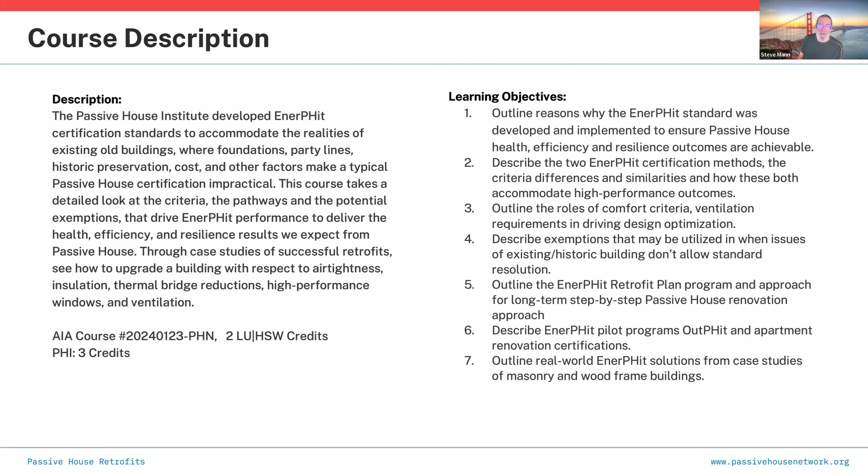Here's the agenda - I think we just did the orientation. I'm going to do 2 minutes about passive house in general and then EnerPHit specifically. I'll talk about the 2 EnerPHit methods - there are 2 different ways you can qualify a building, assuming you want to certify it. I'll talk about some of the more nerdy details of what's involved in passive house in general and EnerPHit specifically. I'm not going to do a deep dive into the nerdy stuff, just enough to whet your appetite if you lean towards the nerd world, so you'll say, oh, this looks interesting, I should learn more about this stuff.

I'll talk about some exemptions for the program. There are a few exemptions with pretty much everything in the world. The answer to all questions is, well, it depends.

Well, that's true in the EnerPHit world as well. It depends. Some things do depend on other things.

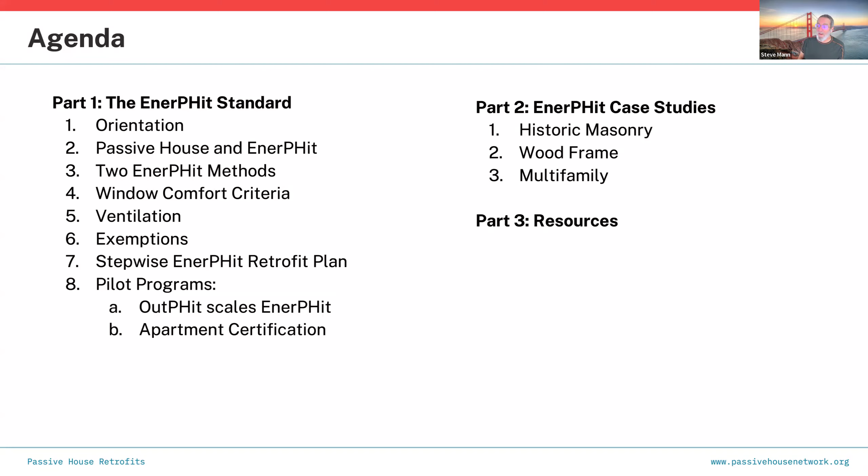I mentioned the pilot programs, and now I'm going to talk about three case studies with pictures, discussing specifics about how you put buildings together or take them apart and put them back together. Unfortunately, none of our case studies are based in California because we've had very few certified EnerPHit projects here. We need more, given the current climate situation. We need to retrofit lots and lots of buildings. Hopefully you'll find this interesting and want to start doing retrofits, becoming part of the climate solution process even more than you probably are now. Since you're here, I'm assuming this is already on your radar.

So let's talk about the standard. It comes from Germany, and the founder of the Passive House Institute calls this a structural intervention, which is his way of saying that if you're going to retrofit a building, you should do it properly. When they decided to develop this program, they had to define the way to do this, so that if you retrofit a building according to these criteria, you're doing it properly.

That means two things: you retrofit the building so that you achieve what you want to achieve, and you do it in such a sequence—because retrofits don't all happen in one big lump typically. They might not, so they assume there may be cases where you want to retrofit in stages. That introduces some interesting situations you need to be aware of in the passive house world. We'll dig into all of that.

The point of this slide is to say that retrofitting applies to any kind of building, from small to very large, and the principles are the same. The way it's actually achieved might differ from building type to building type, but the end result you want to achieve is pretty much identical.

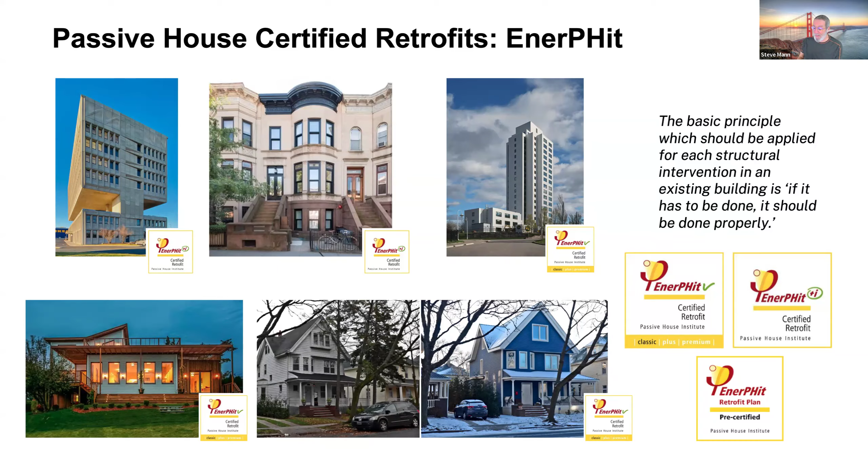Let's talk about passive house, which sets the stage. There are a bunch of goals we want to achieve. There's a stereotype that in the passive house world, the primary goal is to save energy. That's actually not the primary goal, although it's listed first here—it should be last on this list.

The primary goals are occupant comfort, which has to do with temperatures, and indoor air quality—you want excellent indoor air quality. You want the building to be so durable it can last for decades, perhaps even a couple hundred years, and you want it to be resilient. Then finally, if you achieve all those goals, what comes out of that is low operational energy. That's like a side effect, not the primary goal. It just happens naturally if you achieve these other things.

There are five basic principles we look at. Going clockwise from the bottom left in the picture on the right-hand side: first is thermal insulation. We want the right amount of insulation around the whole building, on the outside or inside, creating basically a cocoon—or another analogy is a nice warm coat suitable for all climate conditions for the location you're in.

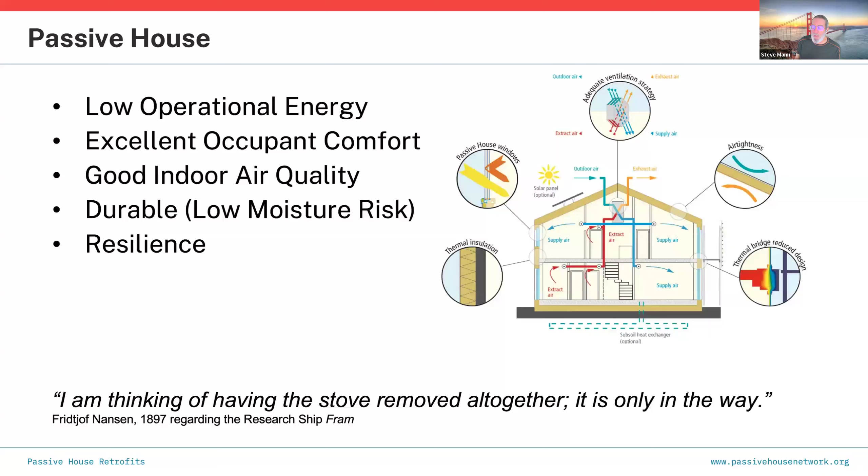That achieves a couple of things: it lowers your operational energy, but also helps guarantee a low moisture risk. We evaluate these things, and if you have those, you have a resilient building. So all of these work in synergy to achieve the goals we're trying to achieve. I'm going to talk about all of these a bit more as we go on.

Okay, this is for passive house new construction. This is one of the nerdy slides. We have very specific numbers we have to hit in order to certify a building, and I'm not going to talk about these in great detail—I'm just going to say these numbers are tough to achieve. They fall into the areas of heating, cooling, air tightness, and primary energy, which is the amount of energy consumed by the building to run the building.

If you look at heating demand, here we have 4.75 kBTUs per square foot per year—you don't need to remember that. That heating demand is the amount of energy the building consumes in a year, and that's typically about 75 to 90% less than a code-built building. That's a pretty tough criteria to hit, but it's totally doable.

Same kind of thing with cooling—again it's 4.75, with a fudge factor for dehumidification if needed. Again, you have to hit that; you can't be greater than that energy consumption.

The tough one is the air tightness: it's 0.6 for new construction. Now, 0.6 is approximately 1/10 of the current criteria for a new single-family residential building in California under Title 24. Same thing for multifamily. So this is why it's scary—that's a really tight building. You really are trying to build a balloon. It's not a perfect balloon, but it's as perfect as you can get it.

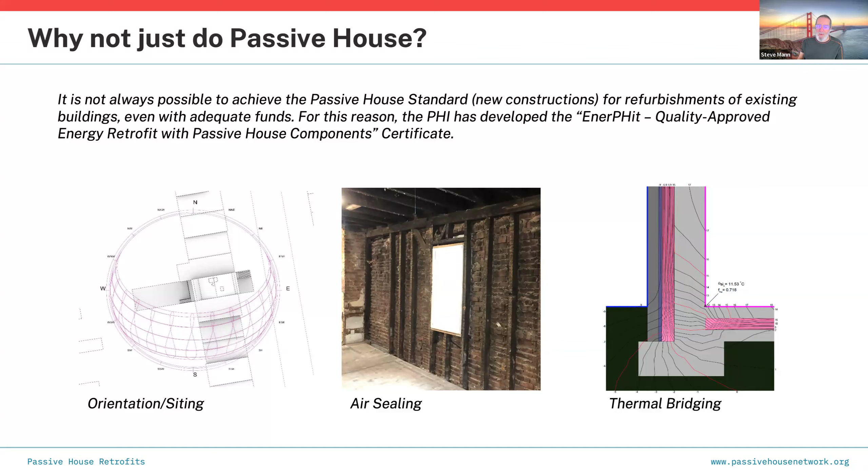These are the two tough areas: the air tightness and thermal bridge free. It's possible to replace windows, it's possible to put continuous insulation on, and it's possible to do mechanical ventilation with heat recovery. So 3 out of the 5 are pretty easily achievable, 2 out of the 5 might be difficult.

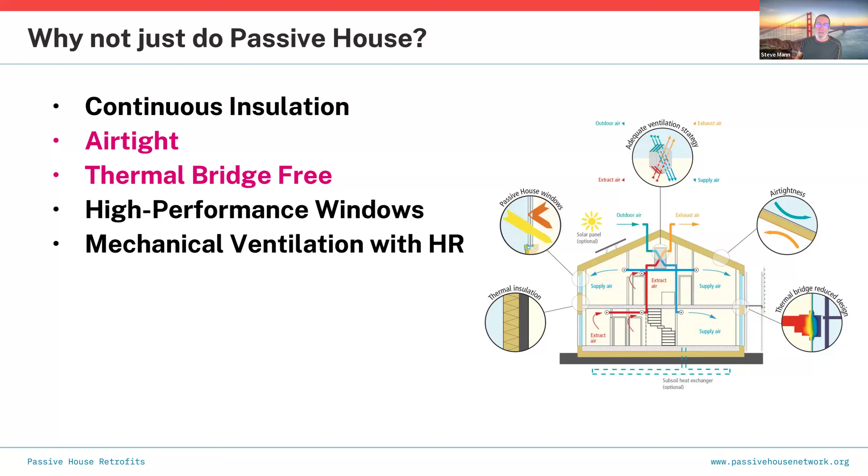So the passive house world was created about 30 years ago, back in, I think, 1990, roughly around there, somewhere in that time frame. They did passive house new construction for 10 or 15 years, and then they said, okay, what about retrofits? So they did the first pilot project for retrofits in 2010.

That equates to roughly about $150 per square foot, roughly. Don't check my math on that, but that's in the ballpark. And what they found was they achieved all the goals they wanted to achieve. Also, the operational energy of the building went down by 85%, so utility bills were reduced 85%. Everybody's now comfortable, and the air quality is good.

The building has been made over so that it now has a lifetime of maybe 100 years, maybe 150 years. Whereas otherwise, if this wasn't done at some point, maybe it would have been torn down and replaced, which is kind of what we do here in North America in a lot of cases.

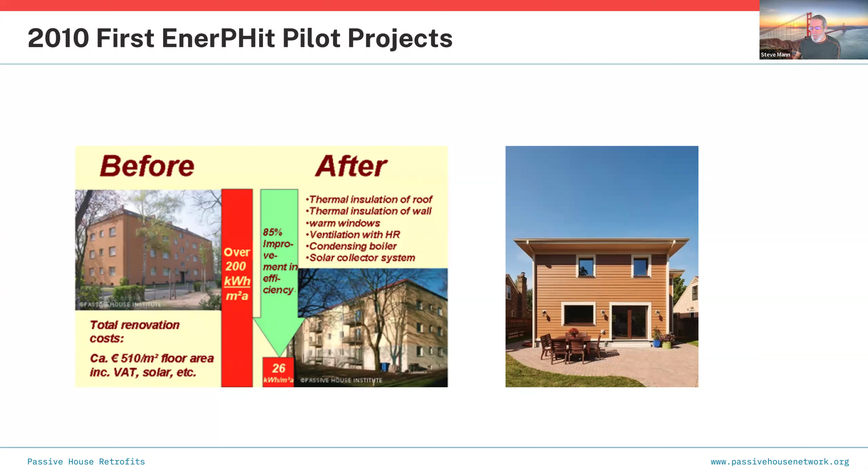The picture on the right shows, I think, the second pilot they did, on a single family residence. Same approach applied, and they managed to achieve the same kinds of results. So this is where this all started, back around 2010.

This is actually, well, it is a retrofit technically, because this was an existing house in Santa Cruz, and they did tear it apart and put it back together, but they did it in such a fashion that they were actually able to certify it as new construction. They met the metrics for new construction, even though it's a retrofit. So it's kind of the first one in California that was actually a retrofit, but technically treated as a certified new construction build. So it's one of those hybrids, a little bit of this, a little bit of that.

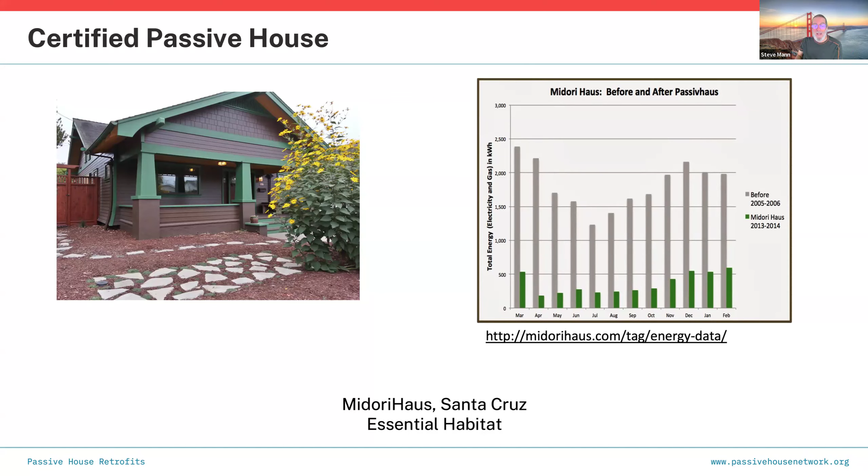But that's the place to start. Talk to a certified passive house consultant or designer or certifier and say, okay, I've got this building, I'd like to retrofit it, here's kind of what its situation is. Do you think that's possible? If so, how do we go about achieving that? And does that make sense? You can start the conversation at a very non-nerdy level, but eventually somebody is going to start digging into the numbers, because there's a very scientific approach to doing these buildings. That's why it works.

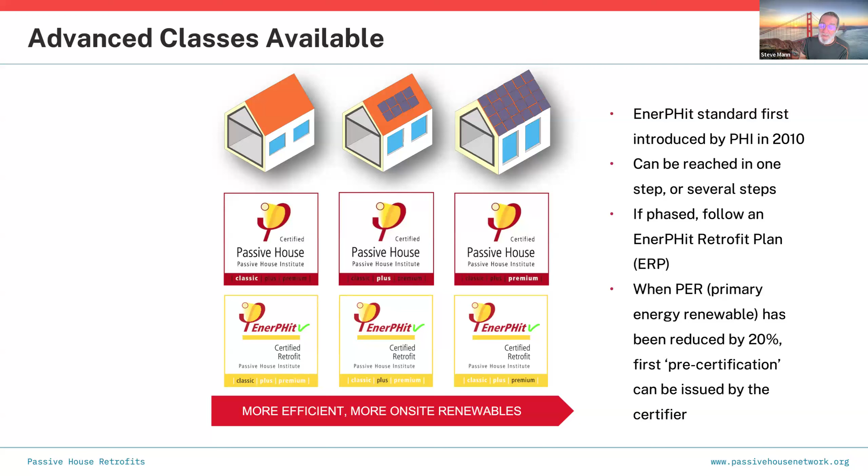Okay. Let me just take a quick drink of water before my throat gives out. All right, I don't see any questions yet, so that's good.

I'll keep plugging along. There are two methods if you want to certify a building as a certified retrofit. The two methods are either the heating energy demand method or the building component method. And then within those two methods, there are the three classes I talked about, where you have more PV towards the right. In addition to these two methods, there's some general criteria that applies to both methods. I'll dig into all of this stuff a little bit more.

The energy demand method is basically a calculation. We use a piece of software called the Passive House Planning Package. A certified passive house designer or consultant, or anybody who knows how to use this software, builds a model of the building in the passive house planning package, does the calculations to determine if certain heating and cooling and renewable energy criteria are being met. And if so, then the building can be certified.

The other method is, instead of doing the calculations - although you still use the passive house planning package, but in a different way, a simplified way - there are a list of thresholds you have to meet for different building components, like insulation values in different locations, window values, ventilation values, and so on. I'll show you a few examples of this. So you can take either approach, and they're both viable approaches. Depending on the situation, one might be easier than the other. This is why it often makes sense to get a certified passive house designer or consultant involved early on, to determine what might make the most sense.

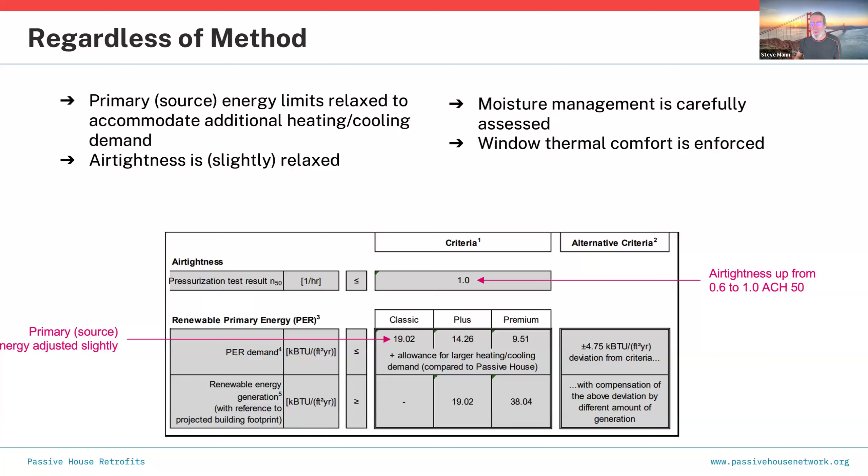This is why air tightness is really the superpower in the passive house world. If you can achieve this and nothing else on a retrofit, you've done a great job of radically improving the quality of the building, reducing energy consumption, and reducing the impact on climate change.

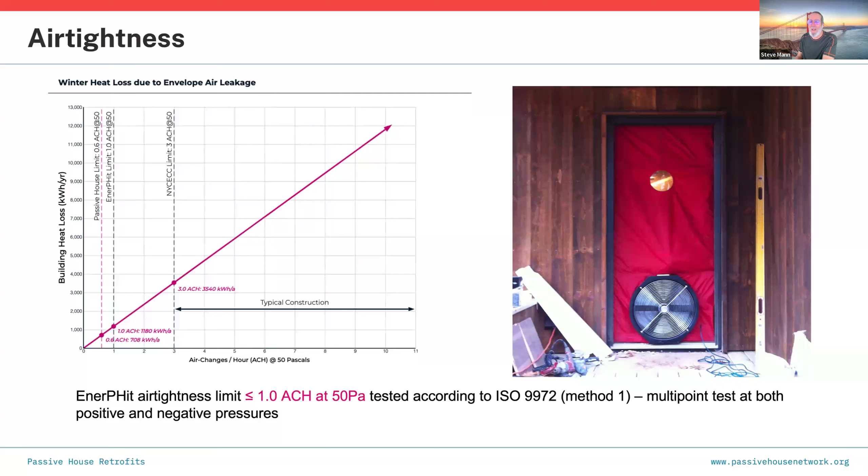there is a mandatory leak detection. So when you set up to do this test, there's a final version of this, this is the grand finale. You do this test, and regardless of whether you hit the number 1.0 or 0.6 or whatever, you're supposed to go and do mandatory leak detection. That basically says, okay, we got our air changes per hour number, but we're also going to go and look to see if we can find any other leaks to get it even lower. You have to do this as part of the process.

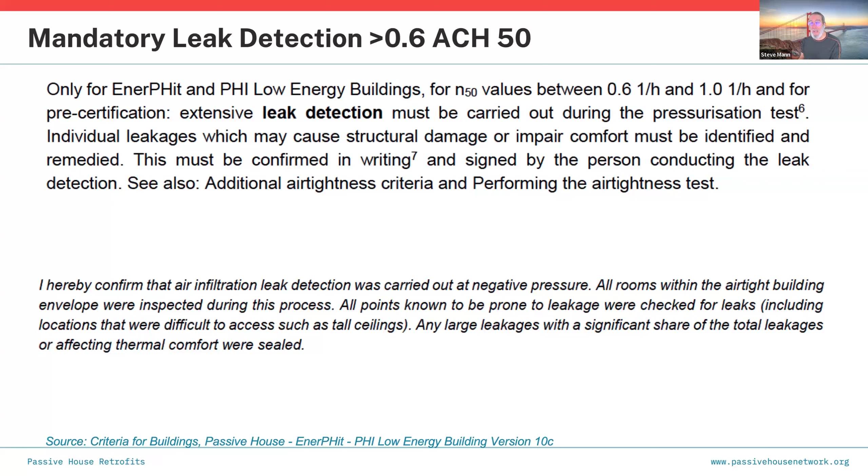And then the builder or the third party doing the testing has to file a document with the certification people that says, yes, I confirm we got the blower door test and here's our number, and by the way, we also went and did this additional leak detection. We looked at all the spots that were prone to leakage. Once you do this for a while, there are certain places that are more prone to leakage than others, so you check those for sure, and you look to see if you can find any other leaks. If you can, you see if you're able to fix them or eliminate them. So this is just going one additional step to make your result even better. This is required as part of the process too.

Okay, so that's the airtightness process. Let's talk about moisture resistance.

I'm going to check our time here. Let's see how we're doing. We're doing okay, I believe. I can find my clock. I don't see my clock. Okay, that's all right, we'll just keep going. Steve, it's 10:08. 10:08. Okay, good. I think we're doing all right. Thank you, sir. Sure, okay.

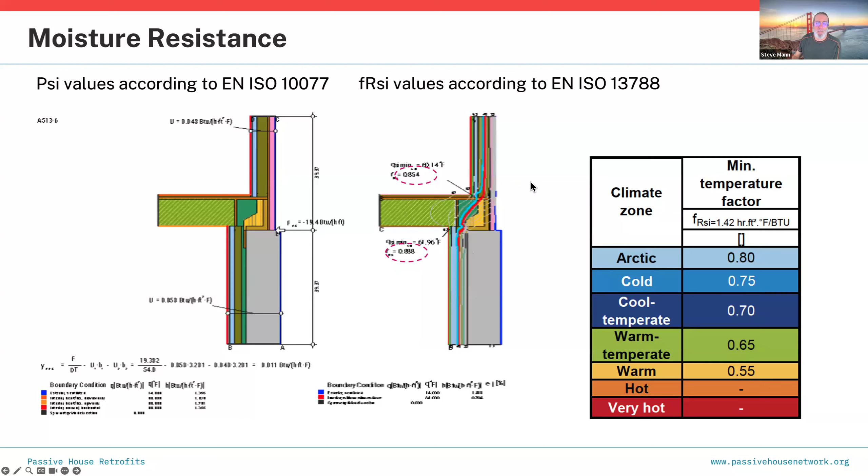In the passive house planning package, there's a threshold that's calculated for this project. Remember, this chart is a good starting point, but in the new world we're in, it's project specific. So in this project specifically, the FRSI number has to be greater than 0.45.

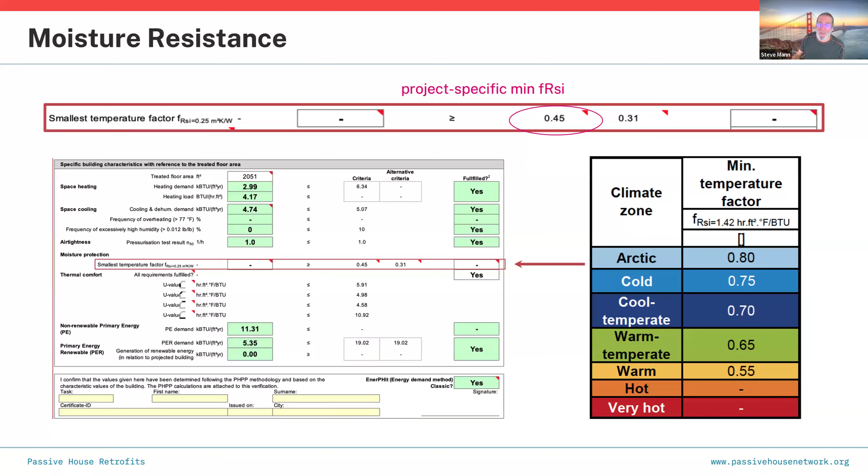The passive house planning package has a dashboard that shows you overall how this project is doing - here's your heating, cooling, air tightness, moisture protection, and thermal comfort, which we'll talk about in a minute. The dashboard shows you everything, and moisture protection is one of those things. If you get all green yeses, that means the building can be certified, or if it's finished and the software reflects the finished conditions with all green yeses, it means the building should be certified and can be certified.

Now the FRSI number in retrofit - you can have constraints, and one of the biggest ones is where to put the insulation. You may or may not be able to tear the building apart from the inside or from the outside, and you don't know until you start digging into the project. There are a lot of reasons why you can't insulate on the outside, although you may want to.

We'll look at some case studies. Where you put the insulation makes a big difference on many things, one of those being the FRSI number. So on retrofits, we pay very close attention to this because the insulation has a big effect on it.

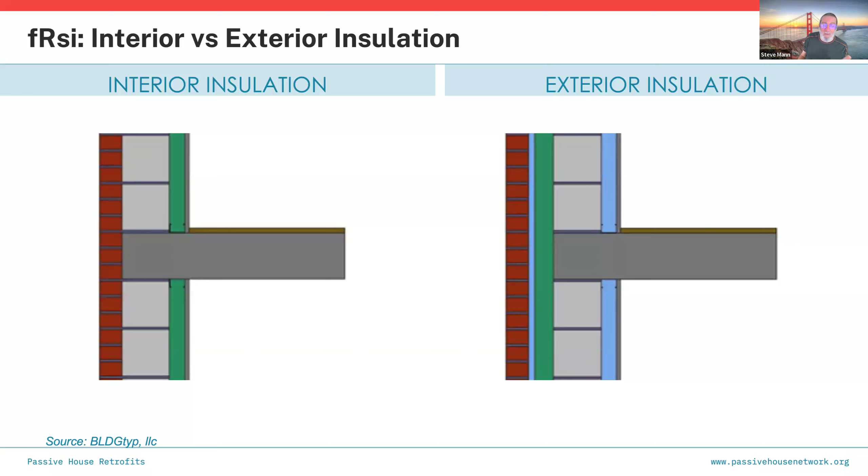If we look at these two cases, on the left, the insulation is on the inside. In these kinds of pictures - this is another finite analysis software picture - it shows temperatures, and the redder the numbers, the higher the temperatures. That's a simplification, but that's kind of it. You want as much red on the inside as you can get, because that means there are no cold spots. On the left-hand side, with insulation on the inside, at that location the FRSI number is 0.554, which may be too low, depending on the climate and the project.

The situation on the right, the insulation is on the outside, and the FRSI number with that assembly is 0.911, which is going to be great regardless of the climate zone, except maybe in Antarctica - I don't know, I'd have to see the modeling software and the outcome. So in a retrofit, where you put the insulation is a big question, and this is one reason why.

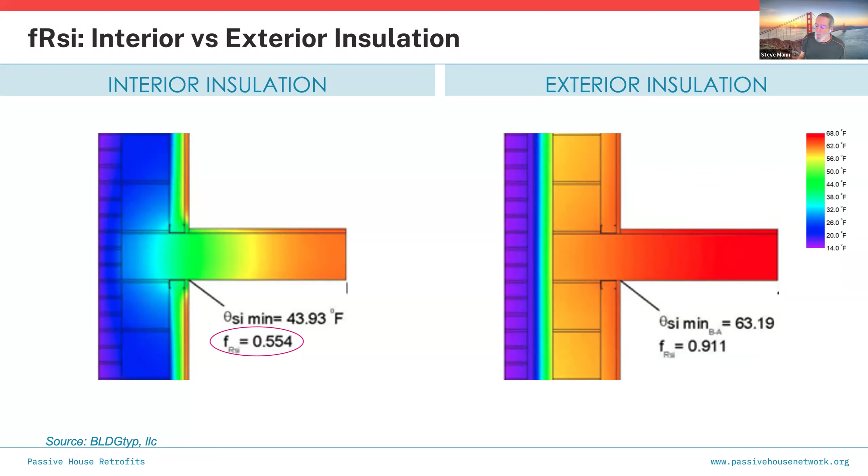If you have insulation on the inside, there are ways to mitigate those potential problems, that low FRSI number. For instance, here's one approach, and this is where you end up getting a consultant involved early, someone who knows how to do this calculation, because before you even start tearing the building apart, you should be looking at this junction and determining if you have a problem. In this case, one possible solution is adding insulation on the inside underneath the floor assembly, which raises the FRSI number from 0.554 to 0.606. That's better, but if it was my building, I'd want it even better than that. And this is ignoring the whole question of, if you've got insulation glued on the wall or ceiling, how do you deal with that architecturally?

Is that in a basement? If that's in a space that people actually use regularly, you're going to have to do something with that aesthetically. So oftentimes with retrofits, we have to look at these junctions early on to figure out how we're going to deal with them. And this is true.

Intersections between walls and floors are big points, but even more problematic or more difficult to deal with are intersections between floors and foundations, walls and foundations, and walls and roof lines. Those are the critical places we have to be looking at. So this is the kind of analysis we need to do in those spots.

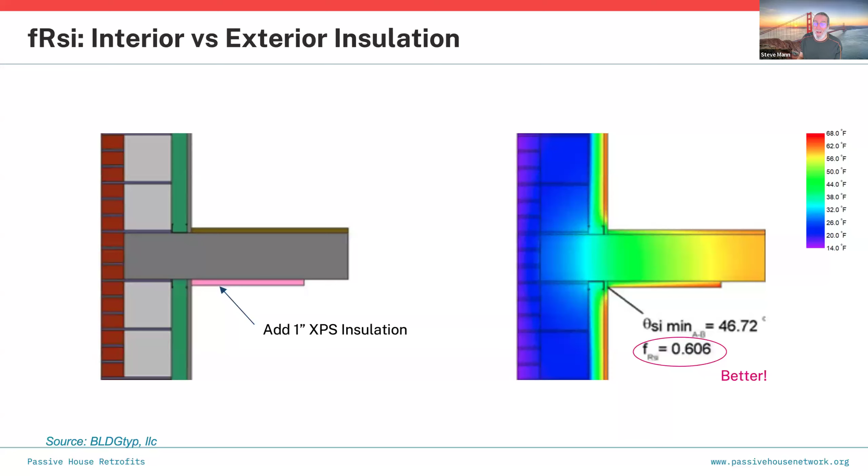Okay, so that's a little bit about FRSI. That's a little bit about psi values, which I'll talk about some more. Let's talk about the comfort criteria.

Remember, the primary reason we build these buildings is because we want to create a situation that the occupants are very happy with. We want them to be comfortable all the time. We want them to have good air quality all the time. We want them to be happy, essentially, to boil it down and simplify it.

One way that people are unhappy in cooling climates or heating climates is if they stand next to a window, or in the vicinity of a window, and the temperature of that window or coming through that window is very different from the temperature we want on the inside of the building. In the wintertime, typically we're looking at about 60 to 70 degrees, and in summertime, we really don't want to be any higher than about 77 degrees.

Those are passive house thresholds. Other systems or other values, let's say like ASHRAE or ISO or something like that, might have different comfort criteria. These are passive house comfort criteria.

So what we need to do, in order for the windows not to be a problem, is make sure the temperature of the window is within about 5 degrees of the interior temperature. Now, depending on how you calculate this and how you look at it, it might be 4 degrees, it might be 6 degrees—it depends on the climate zone and, again, the project and everything else. But we're looking for something in that range.

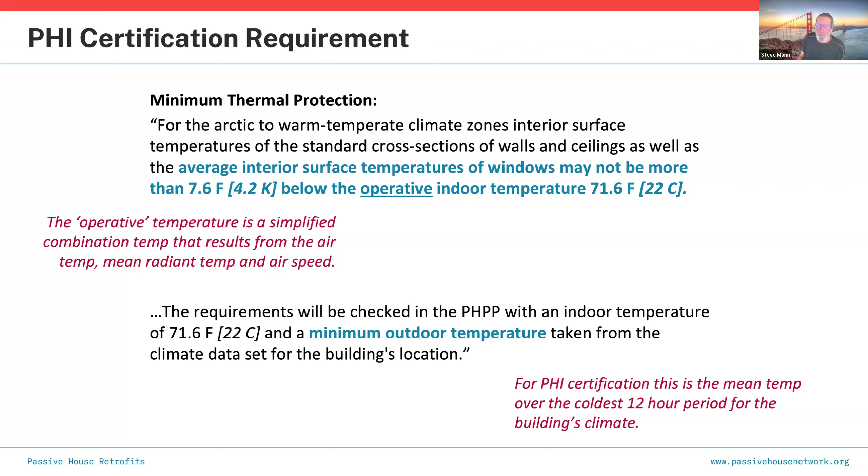Notice that the passive house planning package calculates the actual thresholds, and I'll show you that in a few minutes. It hides a lot of the complexity of the calculation. What you need to know is that you just want to make sure the windows are of sufficient quality so that you do not have a significant temperature difference between inside and outside.

This is what it looks like in the passive house planning package, which is a big spreadsheet. For those who don't know, it's a really big spreadsheet with about 40 tabs in it. This is just a portion of it. Here you can see this is the exterior temperature—they're assuming this is the worst case exterior temperature. So that's the threshold they use to determine the window comfort criteria.

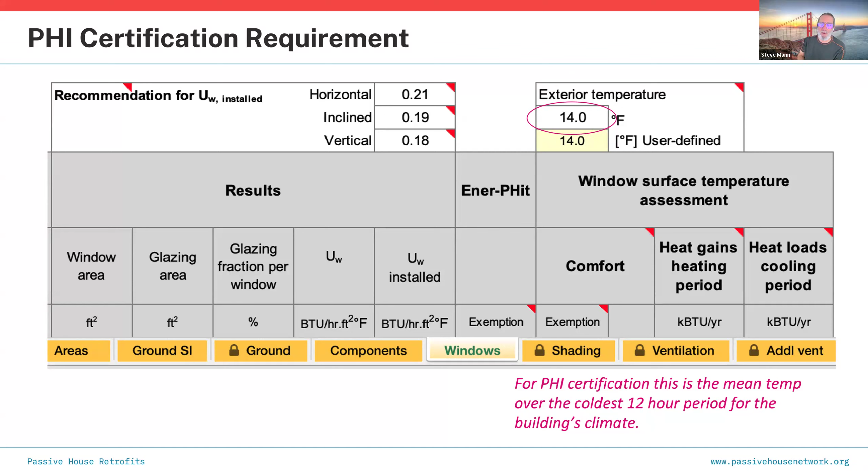So the question is, well, how do they do that? When the passive house planning package calculates what a window is doing, we look at all the individual components of the window. Here, from left to right, we look at the U value of the glass. For those of you who don't know what U value is, it's the inverse of the resistance, which you probably all know.

That's the ability of a material to resist thermal energy transfer. So the U value is the ability of a material to transmit energy through it. We use the U value to make the math work out. Again, that's a gross simplification, but I don't want to dig into that anymore.

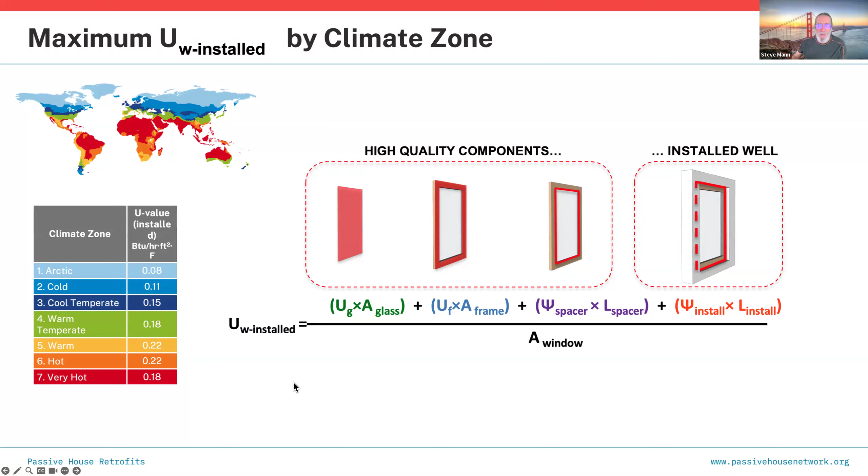But what actually happened is in the Passive House planning package, it looks at this for every window. Notice here, this is for a vertical window, it says 0.18, and this 0.18 is for the UW installed value. So this implies that this project is in a warm temperate climate.

Now you don't know that for sure because it depends on the project - this is a project specific number, but it suggests that. What's more important is that's the threshold for this project, that's the exterior temperature. We calculate a UW install value for each window. Now notice this number says 0.18 is your recommended threshold, and all of these are greater than that.

What happens is there are exemptions depending on the size of the window. In this case, these two windows are smaller than what the Passive House planning package and process cares about. They're assuming that if the windows are that small, the temperature difference isn't felt as significantly because the glass area in the overall assembly area is smaller. So there are some exemptions there.

But notice this one over here, the UW installed value, it's a larger window - 16 square feet - and the UW installed value is greater than the threshold. So the Passive House planning package automatically flags this as exceeding the comfort criteria. That's what we looked at there.

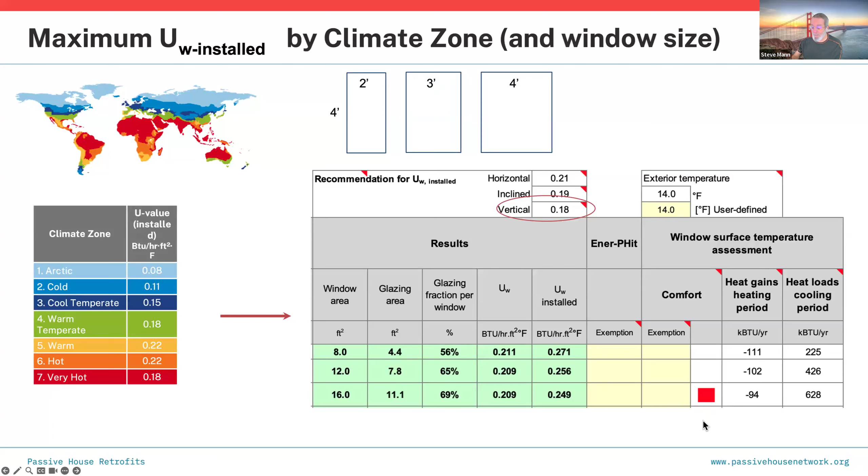Okay, that's window comfort criteria. Let's talk about ventilation.

All passive house buildings have to have continuous balanced ventilation, whether it's new construction or a retrofit. In a retrofit, the question is when do you put this in, especially if you do it in phases. If you tear the building apart and do everything at once, it doesn't matter. But if you do it in phases for whatever reason, you have to be careful about when you put the ventilation in. So here's the basic ventilation concept.

Now you actually have to put air sources in all the supply rooms and exhaust registers in all the exhaust rooms, but you do not have to put some kind of air source or exhaust source in every room. What we do is put supplies in the primary rooms, living rooms, dining rooms, bedrooms in particular, because we spend 8 to 10 hours a day in the bedroom. Then exhaust, like I said, in the bathrooms, laundry rooms, and kitchen. Hallways, entryways, mechanical rooms, closets, places like that don't need to have a direct supply or exhaust in them.

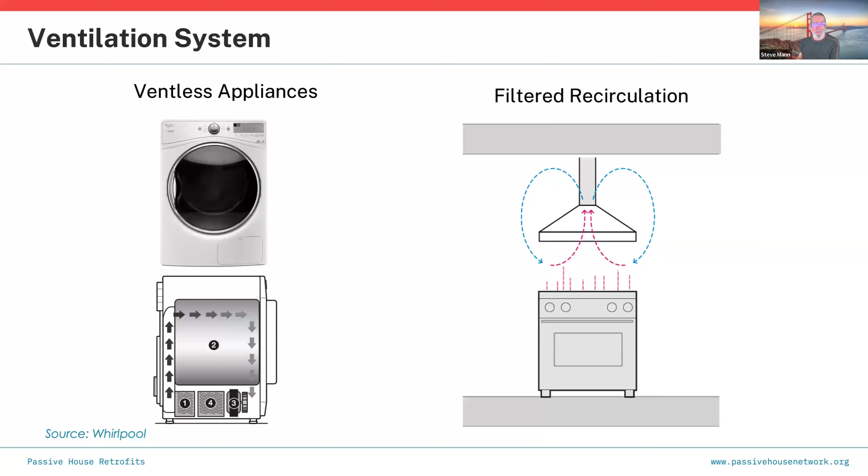Do it in such a way that you don't disrupt the construction sequencing, and that you don't pretty much wreck the interior of the building. You have to put the ducts somewhere. The other approach is each unit can have their own individual ventilation unit, and sometimes that's done. I've seen both approaches done on multifamily buildings. It depends on a lot of factors.

So you need to get your mechanical engineer involved, have that discussion, talk to your passive house consultant, so on and so forth. And one thing that comes into play here, which is not shown in this slide... no, it's not, okay, sorry. It's where do you put the ductwork?

And this comes up for the appliances too. The more ductwork you put in a building, the more potential thermal bridges you have, the more energy impact you have. You want your duct runs to be as short as possible and insulated. So that comes into play when we calculate a model for one of these buildings.

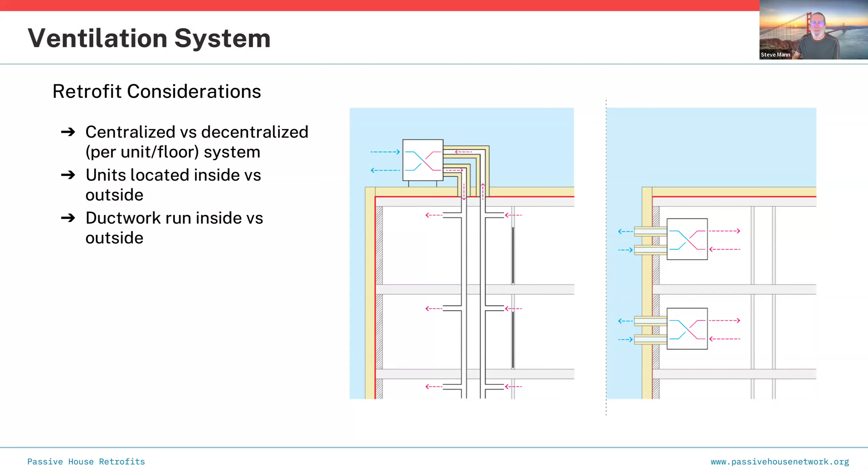We talked about the methods, okay? We're kind of jumping around here. We've already done this slide. Two methods: energy demand and building component, and then general criteria, okay?

On the energy demand method, you actually build a model. It's similar to new construction, but with relaxed criteria. In the EnerPHit building component method, it's prescriptive. We also have this kind of thing in the California Energy Code - performance and prescriptive based methods. So it's similar to that.

In the prescriptive method here in the EnerPHit world, you have specific R values, U values, and you have to have a ventilation system that's at least 75% efficient.

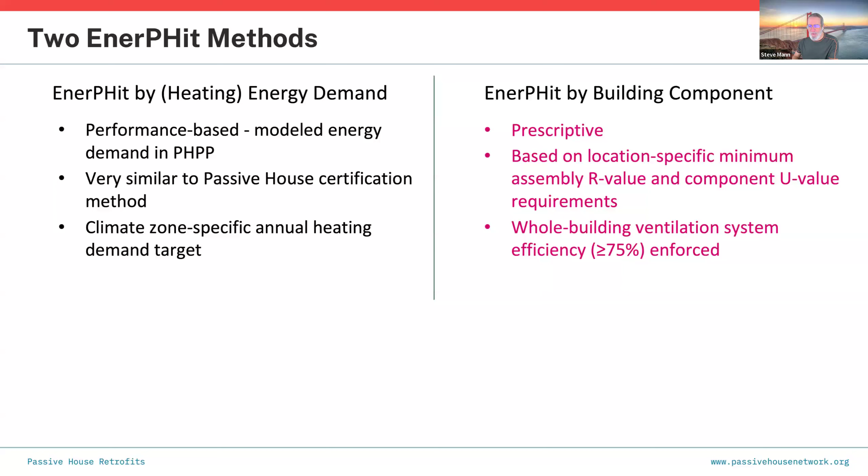This is climate zone dependent. Here are the passive house world climate zones as defined by the Passive House Institute. These are different climate zone definitions from any other organization that I've seen. And for the passive house world, these work just fine.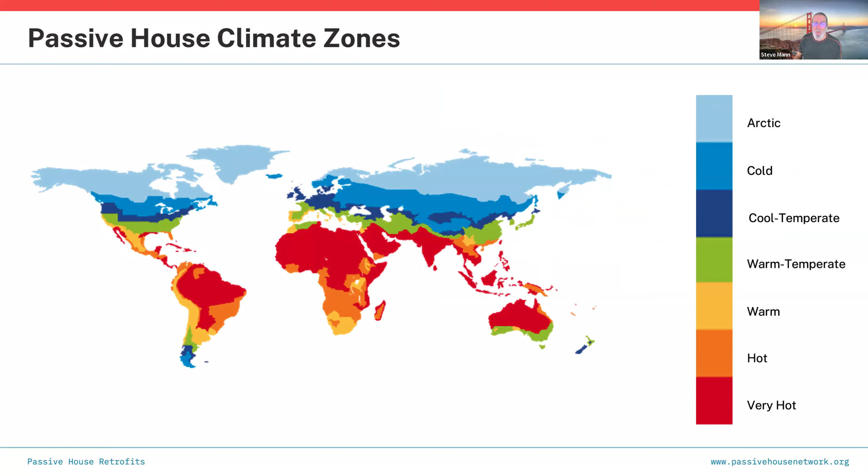I think I've covered that, I think I've covered that. Okay, so in the PHPP, remember I said there's a dashboard. For new construction, this is the dashboard up here. There's also a dashboard for EnerPHit.

Notice this is the prescriptive approach here. This is the building envelope criteria, U values and things like that. There's solar heat gain coefficient, so on and so forth - this is the prescriptive criteria. This is the performance approach, but this is no heating or cooling demand criteria.

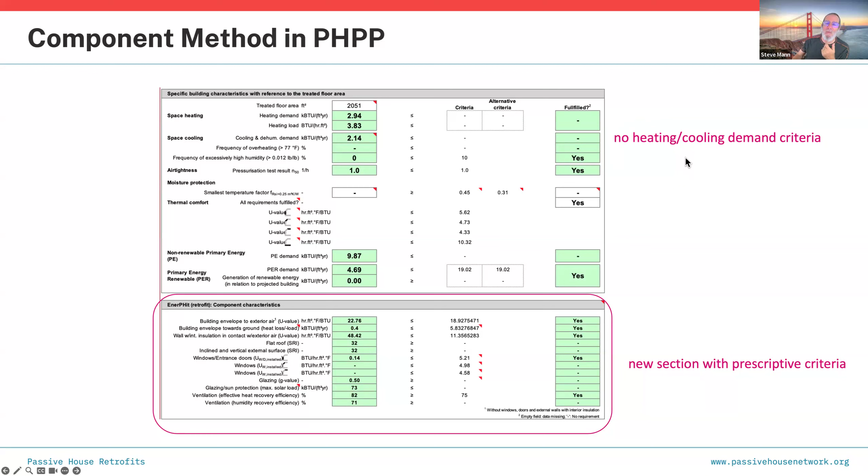That's not true, I'm seeing heating and cooling demand right here. Okay, so this looks suspiciously like - here we go - thermal comfort. This is the EnerPHit performance approach. So this label here is not quite correct.

Oh, here we go with the ventilation system efficiency. That really ought to be in that other location - it just shows two different places. Here's your heat recovery ventilation equipment. Here it's down here, much longer duct runs. Here there's ventless appliances, here there's vented appliances. All this ductwork has to be taken into account.

Notice in this particular case, the 84% efficient energy recovery ventilator - which is one of two acronyms for ventilation equipment - is 84% from the factory, but when you factor in all this ductwork, it goes down to 71%. What happens is these exterior venting equipment, in addition to the ventilation system, like the dryer and the range hood, get factored into this too.

So this is not eligible for component certification. That's the point we're trying to make here. So it matters where you put this stuff - that's the simple message here. And that has to be figured out in advance, again probably before you start tearing the building apart.

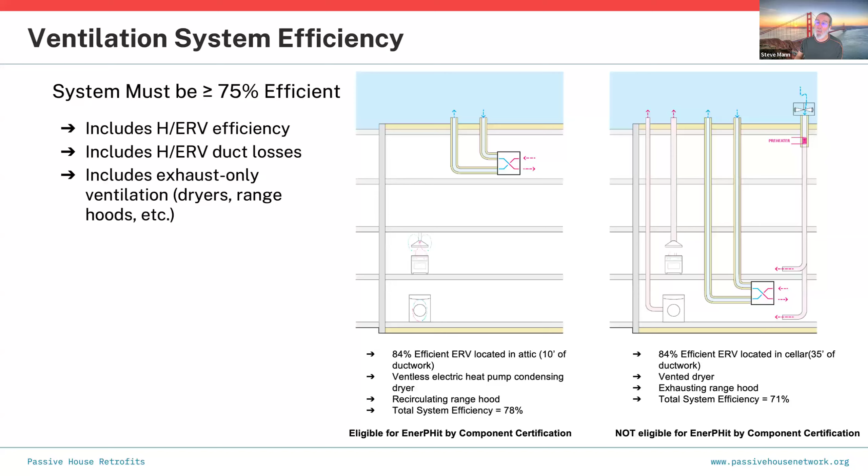Exemptions - there are exemptions in EnerPHit. There is the criteria that we've talked about, but there are certain problem areas that you just might not be able to work around. We have a similar thing in Title 24 - there are exemptions in certain cases. Let's say there's an exemption for solar PV installation if the building is surrounded by too many trees and there's no solar exposure. There are exemptions for historic buildings that are designated historic structures where you cannot modify the outside, at least the visual appearance, so on and so forth.

We have a similar thing in the EnerPHit world. Here's a couple of them: legal requirements - I can't think of a good example of that - and historical building preservation authorities, that's kind of a legal requirement.

Cost effectiveness: if in order to insulate the building properly you have to spend two times the budget you've got available, or whatever reason, I'm not quite sure what the effective threshold is. It's kind of up to the designers, the architects, the developer, and the building owner to determine what's not cost effective and to make a case.

No available components. Let's say in a particular case you need a fire damper of some kind because the local building code requires it in a multifamily building, and you just can't find one on the market in the United States that satisfies the EnerPHit criteria. The biggest one, which will show up on the next slide, is the heat transfer coefficient, or the UW install of the window. That's other compelling reasons related to construction.

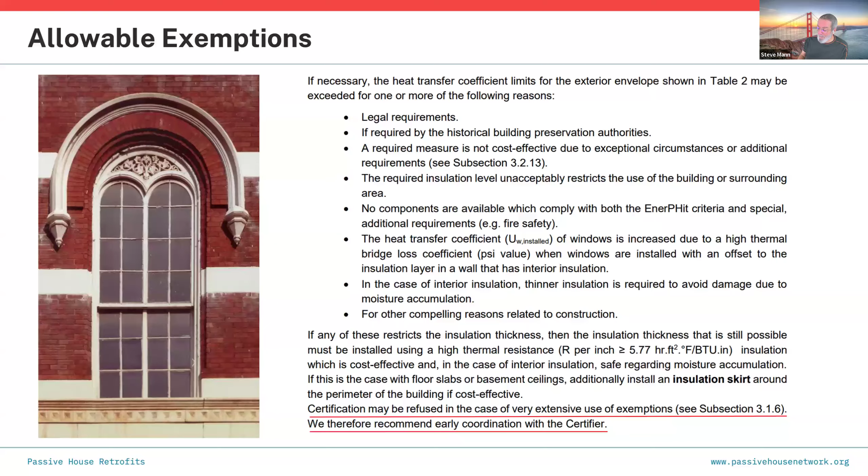Here's one of the compelling reasons. Remember I mentioned the thermal comfort requirement for rooms with prolonged occupancy. This goes back to the window issue, or maybe the FRSI issue. You could make a case for that, although that's a tough one because FRSI problems introduce mold, moisture, and mildew, which you don't want regardless of the use of the room. That's more for window comfort criteria.

The one I've seen most is the window comfort criteria where you just can't hit it for whatever reason. The case I'm thinking of is a commercial building, a franchise actually, and the franchise had specific requirements for sizes of windows, locations of windows, and the direction the windows were facing. They found that regardless of what kind of windows they bought, there were no windows on the market that would satisfy the window comfort criteria.

They were able to get an exemption for that by putting little heating sources directly under the windows, like strip resistance heaters. So if it was too cold outside and the comfort criteria was not satisfied, the heaters would turn on and the surface of the windows would rise, satisfying the comfort criteria. That has a penalty on operational energy, but it worked out. It had to be calculated in the modeling, and the additional energy consumption did not turn out to be a problem.

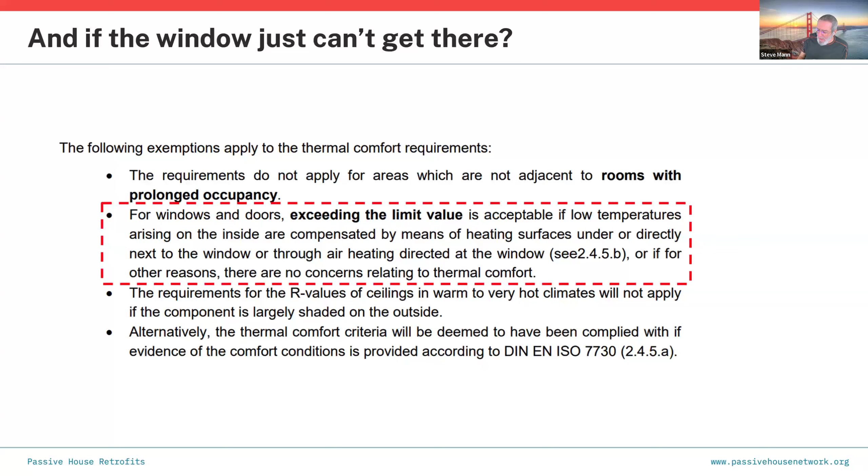So if you're looking at EnerPHit and it's a challenging situation, there is some wiggle room above and beyond the specific certification criteria, depending on the circumstance. This is the case of a door threshold that just didn't hit the comfort criteria, and they put a strip heater under there. If you do an infrared camera shot of that, right at the threshold of the door, the temperature was more than sufficient to satisfy the comfort criteria.

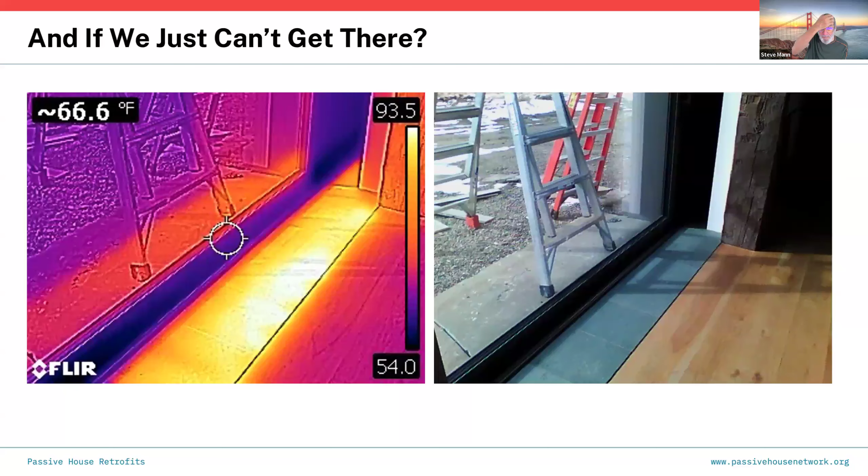Okay, so that's some of the things we look at. That's by no means everything. Oh, I see a question from Dorothy.

Does a solar array on the roof count as shading? It depends on what world you're talking about. In the Title 24 world, no, that's irrelevant—it does provide some shading, but Title 24 doesn't really care about that. In the passive house world, it can count as shading, and in fact you're supposed to take into account the effect of shading on different parts of the building, not just the windows, but all the surfaces. The thing is with solar panels, they do cast a shadow, but they're also glass, so they cast a shadow but don't really effectively block a huge amount of the solar radiation, though I've heard some solar panels do that better than others. You really don't get a huge benefit from treating those as shading—you can get a little bit, but it's not a huge surface area or a significant benefit. But technically in the passive house world, yes, you can. Hope that answers your question, Dorothy.

Okay, the retrofit plan. Now remember, there are two types of certifications, and there are different ways to go about doing a retrofit. Excuse me, just a second, more water.

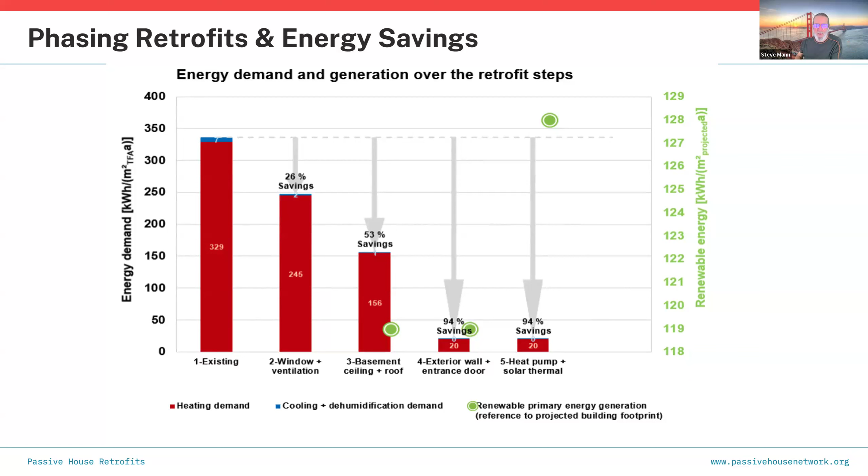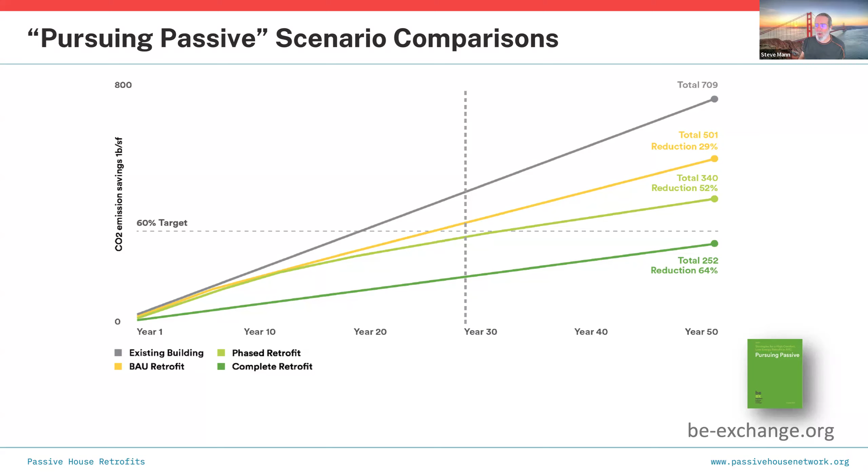But if you can't, in the middle you've got two different types of retrofits, and they both definitely reduce CO2 emissions, but only by 30% in the yellow case and 52% in the light green case, over a 50-year time span. So that's better than nothing, but not nearly as good. At the top we've got an existing building that doesn't get retrofit. This is assuming a global CO2 emission total of 709, I'm guessing that's pounds per square foot over a 50-year lifespan. So clearly the best thing to do is a total retrofit all in one step, if you can, from this perspective.

That's kind of it in the EnerPHit world. That's the introduction. Now let's talk about the pilots—these are other things being done in the EnerPHit world.

The first one is something called outPHit, catchy name. Basically what they're doing is taking prefabricated components and putting them on the outside of a building while people are living in the building—hence the name outPHit. What they're trying to do, like the EnerPHit pilot they did 15 years ago, is determine if they can take this approach and achieve the EnerPHit standard. So it's in a pilot phase.

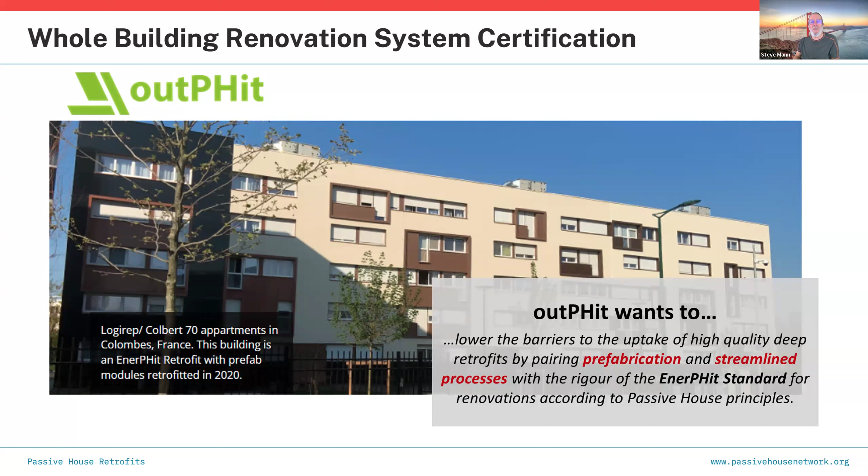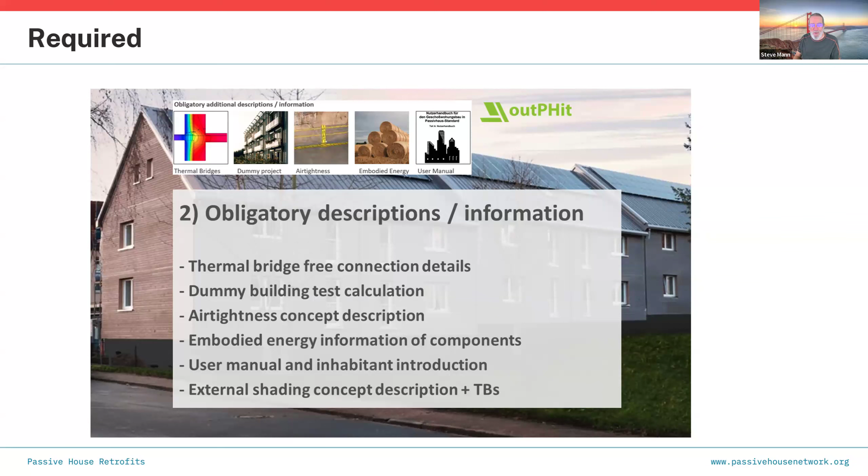In order to do this, you have to do analysis that contains all this stuff. You have to look at the thermal bridges. You have to do a dummy building test calculation, which is basically a building model in the passive house planning package. You have to describe how you're going to make it airtight. You have to talk about the embodied energy of the components, which doesn't come up in the new construction or EnerPHit world, although people are starting to pay attention to embodied energy. You have to write a user manual and inhabitant introduction so that while people are living in this building, you explain to them what you're going to do, how it's going to affect them, please don't be alarmed, that kind of thing. And then you have to talk about your shading concept and how you're going to mitigate your thermal bridges. You have to write all this up. This is part of the process.

As part of this, you being the implementer of an outPHit project, you're also encouraged to do a step-by-step retrofit concept, a renewable energy system implementation of some kind, service solutions, maintenance services, a PHPP calculation, funding application services, quality assurance services, monitoring, all these things. So it's one thing to describe and figure out what you're going to do to the building, but they also want you to figure out how this building is going to operate or perform and be taken care of once this outPHit is done.

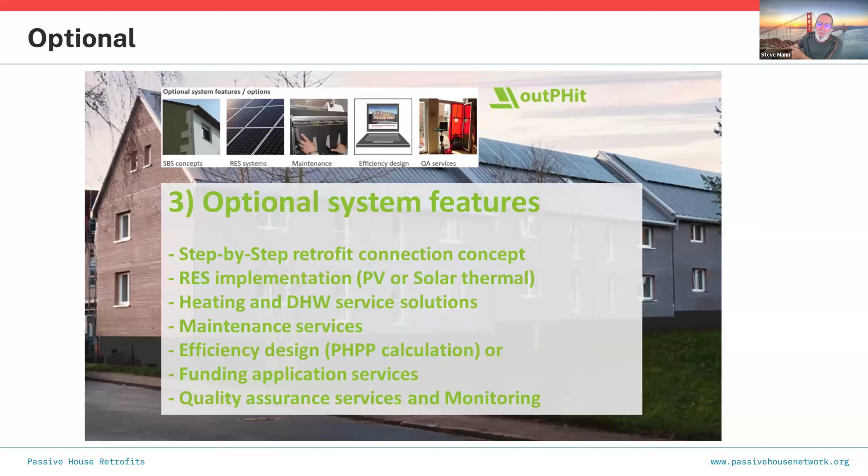I did actually see a couple years ago a presentation about somebody considering doing this in the United States, but it was an evaluation of a possible approach. I don't think anything ever came of it. I'm not quite sure, I haven't seen any mention of it since.

Dorothy asks a point of confusion: wouldn't just adding rooftop solar already reduce the energy demand by 20% and qualify the project for pre-certification? No, it would reduce the source energy, which is different from the energy demand. The energy demand is the amount of energy consumed by the building for heating and cooling. Remember the metrics: there's heating demand, cooling demand, an airtightness requirement, and a primary energy requirement. The primary energy requirement would get reduced by the solar array, but it wouldn't have any effect on the heating demand or cooling demand, because the amount of energy required to heat and cool the building would not be changed at all.

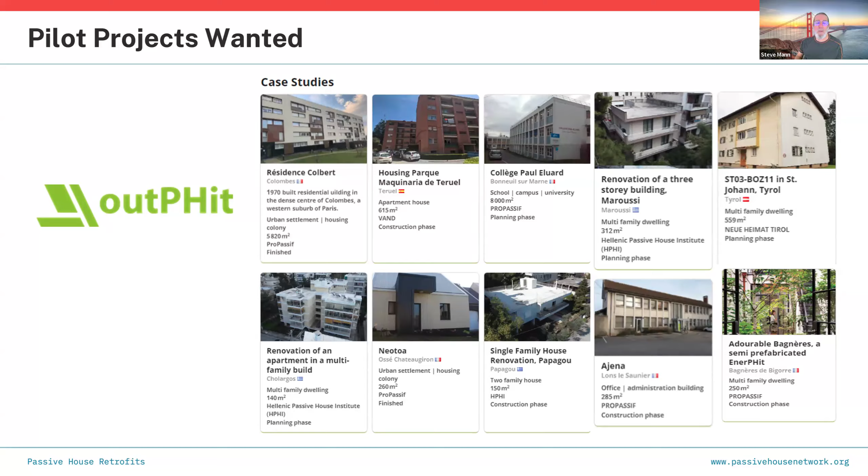Okay, the EnerPHit partial. This is the other pilot. They're actually looking at people who want to retrofit their apartment to passive house standards, but they're in an apartment building, or a condo building, or a townhouse development, and they have no control over the rest of the building. They're starting to look at this.

What they're doing is they basically say, well, you do it to the component method as best you can, but there's some wiggle room on the airtightness requirement. That's measured differently because you need to take out the factor of connections between this apartment and adjacent units, since you have very little control over that. There's some things you might be able to do, but you probably can't hit all the surfaces and seal things up that tightly.

The primary energy demand - if heating, cooling, ventilation, and hot water are all provided by multi-unit equipment, you have no control over your primary energy demand. Going back to your question, Dorothy, in this case what we do is assume that sometime in the future the building will have to replace these services, and they'll replace them with energy efficient heat pumps. So we assume that equipment will be what's powering the unit at some point in the future, and that's what we look at in terms of mechanical equipment.

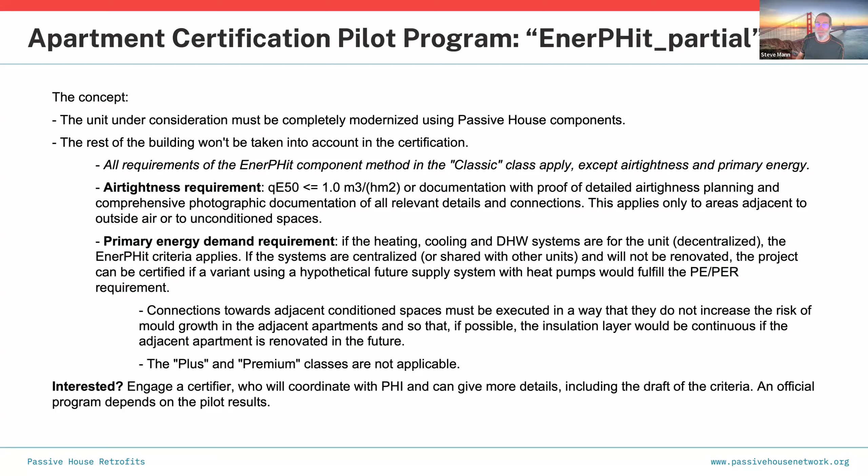All right, so that's the nerdy stuff. That's sort of what EnerPHit is all about. Hopefully that at least gives you a good introduction.

So I see we've got about 25 minutes left. Is that right, Sarah? 30 minutes, something like that? We have 35 minutes. Okay, good.

All right, good, plenty of time for case studies. Going to do 3 case studies. Thank you, Bob. Unfortunately these are all from the East Coast, because those are really the only certified EnerPHits we've got in the United States - well actually, one of these is in Canada. So we don't have many of these, we need these, we should be doing that. Hopefully once you're done here, you'll go forth and look at projects that are actually EnerPHitable, if that's a word, and you'll go make that happen.

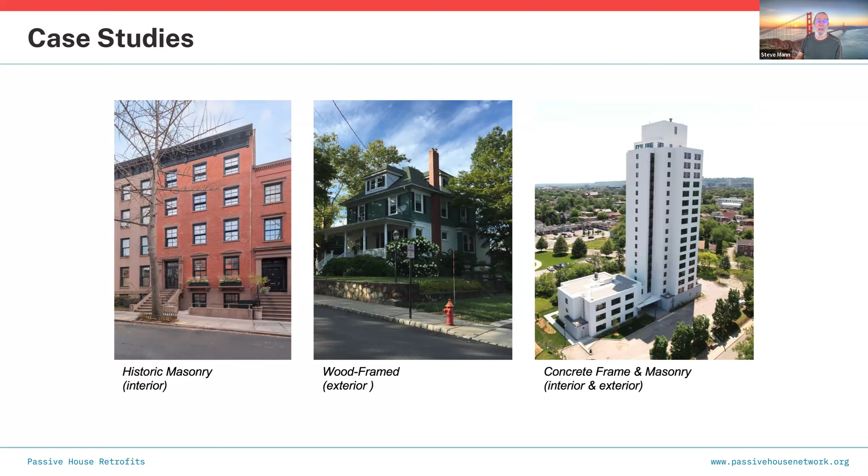First one is going to be masonry - we don't have a lot of masonry here in California. Second one is wood frame - this is most typical of our single family residential construction anyway. And the third one is concrete frame and masonry. We have concrete frame construction here for larger buildings; I'm not sure about concrete frame and masonry again. We're in a seismic part of the world, so depending on where you are, I'm not sure we have a whole lot of that type of construction. But anyway, good examples with different challenges.

Masonry - this is in New York, in Brooklyn, and it's masonry, as you can see on the right-hand side. In this case, they do a lot of this stuff in New York - there are architectural firms, construction firms, and tradespeople and specialties that just do passive house retrofits of masonry buildings in New York. This is a real specialty there, and there's a lot of activity in this area. Now there are not thousands of these being done because it's expensive - there's a lot of work involved, and there are only so many people that know how to do this.

But we're seeing a trend there. So there are at least several dozen of these in the New York area that I'm aware of. If you do a gut renovation, it's the easiest way to approach this.

And these are old buildings, 200 years old. And as you can see from the brick, they have a tendency to start falling apart at some point.

This is what this row house looks like when it's done. And this is a rendering of the final building. The red band is the thermal envelope—this is the insulation layer and probably the airtightness layer as well.

They actually retrofitted all four floors and dug out the basement to make it usable head height space as well, so it's essentially five floors. And then they put a little addition on the back as well. So all of this was part of the EnerPHit process.

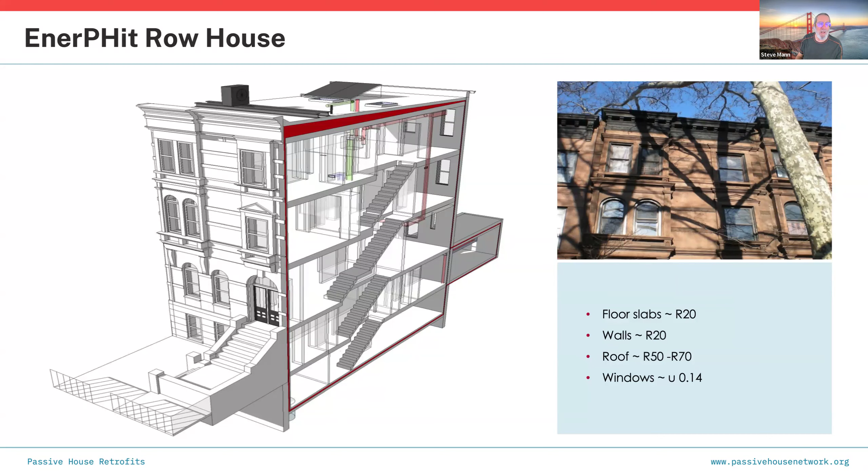Here's a couple of examples of things they had to look at. They insulated from the inside. Going back to those conversations, or the details I showed you, about insulating from the inside or the outside—if you insulate on the inside, your FRSI numbers are going to be lower, and you have a higher moisture, mildew, mold, and condensation rate than if you insulate on the outside. But if it's your only choice, it's your only choice, so you figure out and deal with it.

This is what they did in this case. This is a section, and in the fronts they insulated more deeply—I'm not going to talk about the details too much. On the party walls, they insulated a little bit less, but they insulated some there.

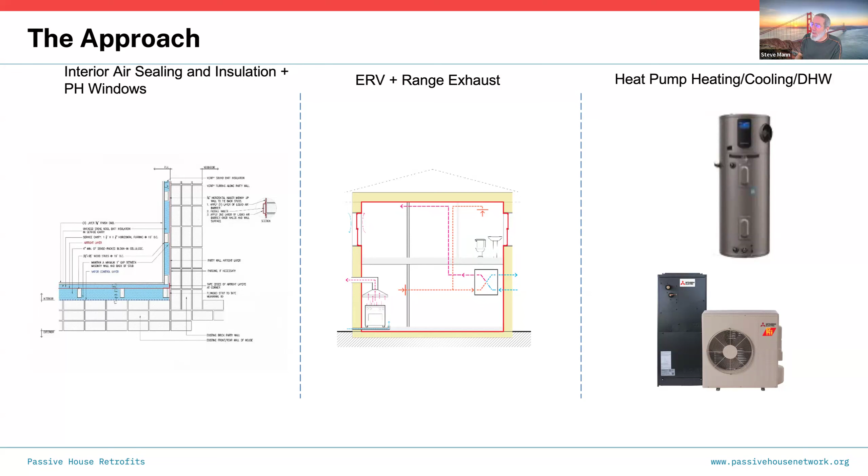Then they had the typical things you had to deal with. They upgraded the heat pumps, both for hot water and for heating and cooling—a ducted heat pump for heating and cooling. And they had to figure out venting and exhausting all of that stuff. Same issues that you have on any other building that you're going to make airtight.

They pretty much ripped apart the basement and uncovered all the masonry walls, because all five floors were masonry. They dug up the basement and poured in a new slab—I'll show you that in a minute. The problem with the masonry is it was really, really messy. And their air barrier was going to be on the inside.

Their strategy was first to repoint everything where it was needed for structural purposes - that's the guy in the middle doing that. Once they did that, they went ahead and put an airtight layer of something on there. I'm not sure what that was, but it's an airtight stucco-like material, and that's their air barrier.

On the floor in the basement, they poured a new concrete slab and tied these two together, which we can't see here. Concrete that's at least 4 inches thick is considered an air barrier, although I dispute that depending on the situation. In cases where they had structural connections to make in corners, like this corner back here, where they had to bolt stuff in, they bolted into the existing masonry, but they had to air seal it. So after they put the gray stuff on, they drilled for the bolts.

They put this black stuff on - this is a technical term, we call it goop. They put black goop on, put the structural things on, put the bolts in, and gooped everything on top, behind, everywhere. They pretty much sealed the heck out of this whole thing, and that's how they did their wall-to-wall 90 connections.

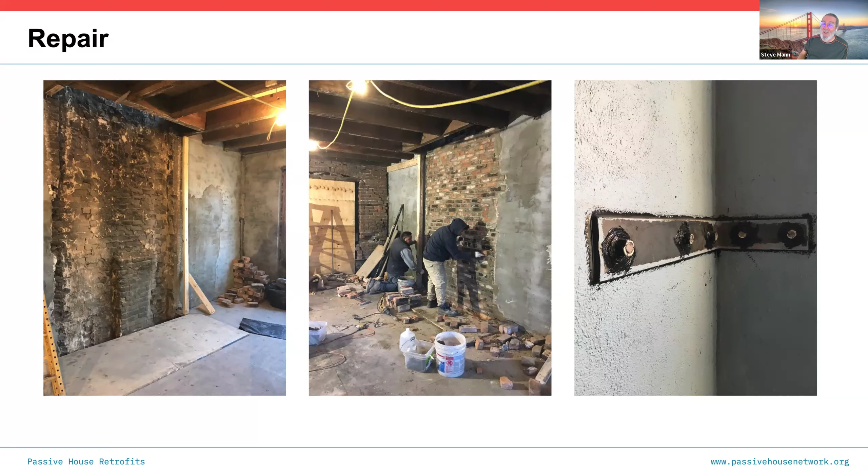In the basement here, this is where they dug out the basement. Here's the new slab. Since they dug out lower, they had to reinforce the slab, but they couldn't dig underneath the slab, so they had to reinforce it from the inside. So they built this shelf to reinforce the slab, to reinforce the foundation from the inside. And then they turned that into a feature, like a sitting shelf.

This is what the structural wall looked like when it was finished, the masonry wall. This is what the air sealing looked like on one of the roof sections - they actually used ACX plywood and taped the seams. Plywood can be used as an air barrier if it's properly detailed, so you can mix and match materials any way you can to get to what you need to get to.

Notice they replaced some of the floor joists with open web metal trusses. In this case, they would have had to think about thermal boundaries or thermal issues where these trusses hit the outside of the wall, but I'm sure they did that.

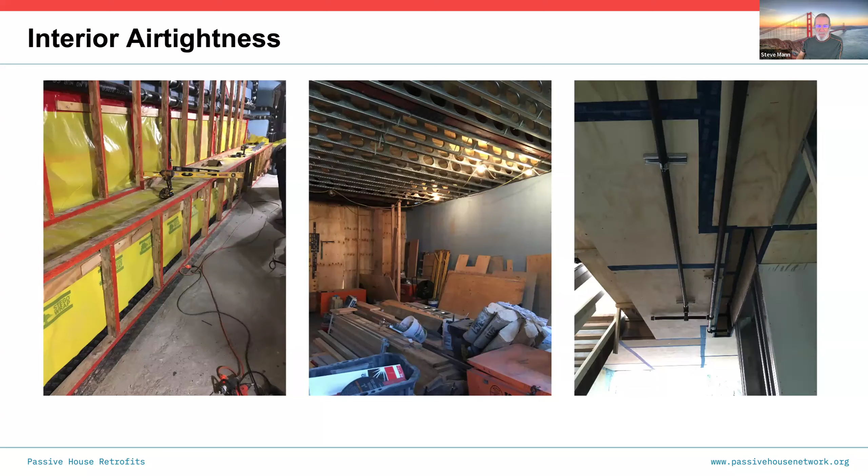Here's the air barrier down in the basement. This stuff is Stego - this is also a water barrier and air barrier, and notice they taped all the seams on the bottom here. Then they taped all the penetrations - you have to worry about that. Then they brought it up to the walls and tied it into the walls. Now they didn't finish this off - this is not a finished air barrier right here, but they get to that eventually. They're not showing everything here.

And here is that shelf down in the basement right there. They finished it off - again, air sealed it.

Upper floor beams - they had to replace a lot of beams, I don't know if they replaced all of them, but they had to replace a lot, and there were pockets in the masonry walls. Now they couldn't, unless they were going to build a new structural wall inside to hold up all the beams, so they had to take the new beams and put them in the existing pocket, which is what they did. In order for that to work, they had to take out the old beams.

This is the air and water barrier they used higher up on the interior walls. They didn't use the gray stuff, they used the blue stuff - blue roll-on or spray-on material. They had to also use this material on all of the pockets before they put the beams in, otherwise there could be air leakage around the beams. Again, painstaking work, beam by beam, both sides.

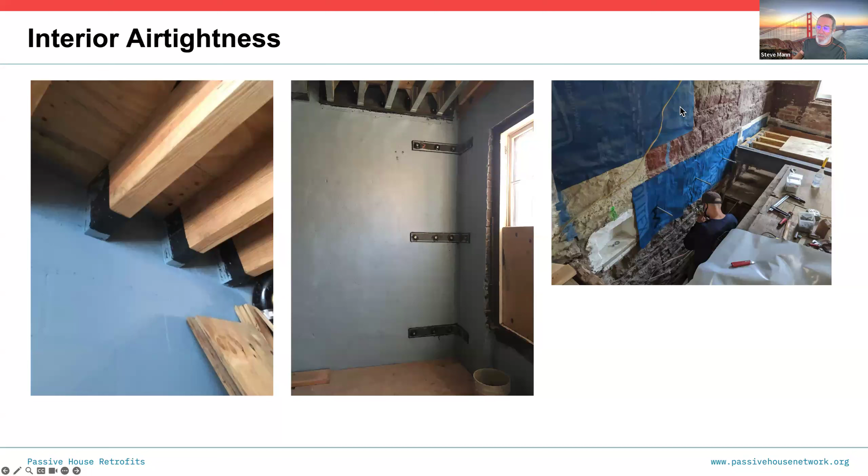You can use different types of materials as long as they play nicely with each other and they can be tied together. So for this ledger, they had to put their air barrier material behind the ledger before they put the ledger in place, otherwise they could have leaks through the bolt holes and through all this masonry stuff that was behind them. Once they mount that, then they can tie it into everything else. Painstaking work.

Interior insulation: they put metal framing on the inside. Notice what this looks like - here's the metal framing, there's a gap here. So they eliminated the thermal bridge from the metal framing through the wall to the outside. This wouldn't have been a significant thermal bridge, but if you can eliminate it completely, why not? So they put a layer of insulation, their metal framing, and then filled that with insulation as well, and that's how they finished out the inside. So they did steal some square footage on the inside in order to insulate - they had to, it was the only choice they had.

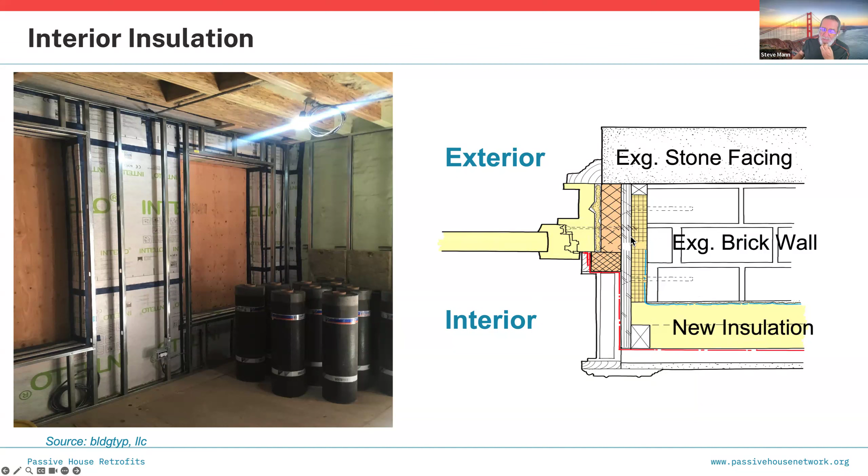Notice here's the window installation. They insulated between the stone and the window frame, on the inside, and underneath to separate the window from the stone as much as possible. Now there was a thermal bridge here, but it'd be minor and they would have calculated that.

This is some interior insulation - I'm not quite sure what this is. I think they insulated on the floor here, for some reason. That might be down in the basement.

This is what they did in the steel framing - they put a bib surface on it. This is also an air barrier and vapor barrier, essentially a vapor control layer. Then they blew insulation into it, and when you're doing this correctly, you take samples and measure them for density and weight to make sure you're getting the proper density - that's the only way you know you're getting the proper R value. When you certify a building, you have to submit pictures like this showing the thickness of the insulation and the density to make sure the R values are correct.

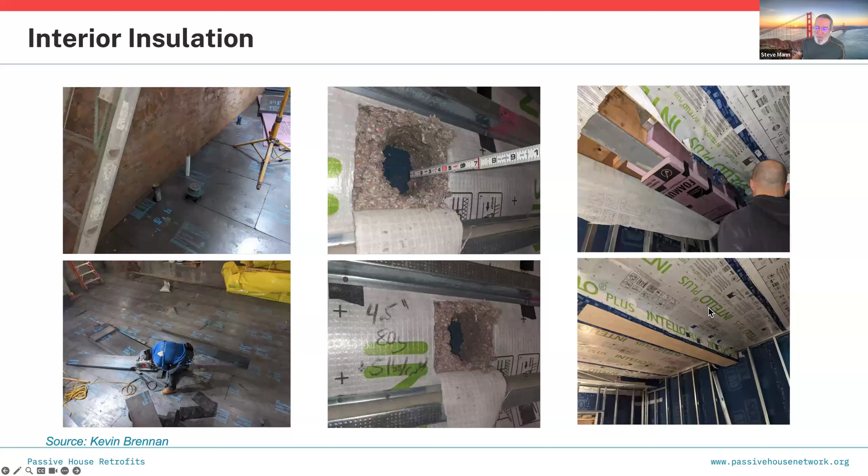Here there's a steel beam, definitely a thermal bridge to the inside, so they covered it up with rigid insulation, wrapping it in rigid insulation. Then they put a plywood layer on it and wrapped the interior air barrier around the whole thing. So the air barrier here is this membrane, then plywood with seams taped, and they eliminated the thermal bridge to the inside. You have to get pretty creative on these kind of retrofits.

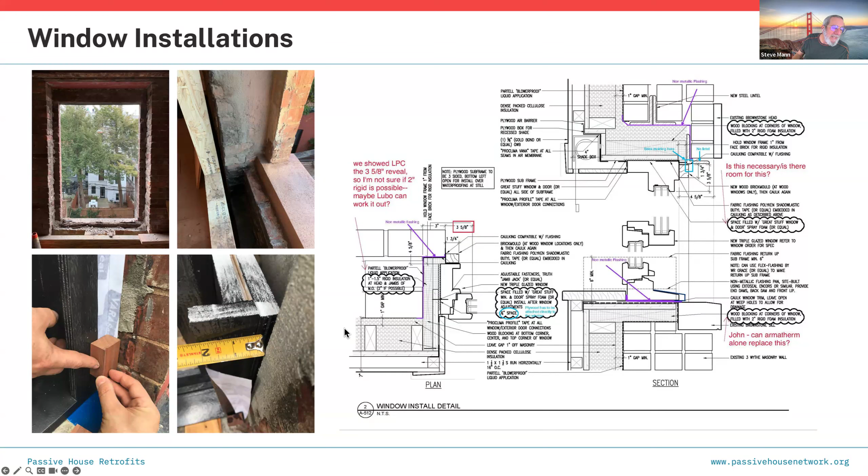And then this is what it looks like in the field - again, pictures of the insulation with their thicknesses, and in this case, pictures of the window bucks. This is what it looked like before they cleaned it all up so that they could do the install. Just tearing something like this apart and cleaning it up so you can do this on this many windows is a lot of work.

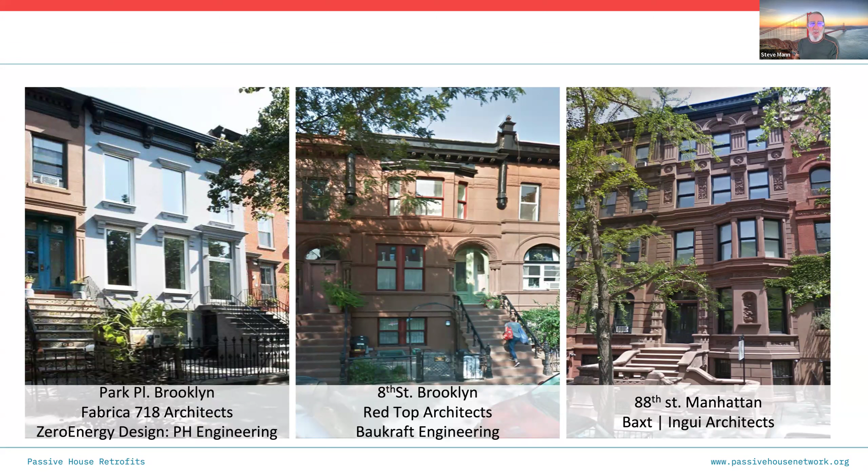Okay, ready for the next 100 years, maybe 200 years, who's to say. So that's a brownstone - like I said, there's lots of people in New York doing this, these are just a couple of examples. These people are all doing multiple projects, but they typically only do a couple at a time because from an architectural and construction perspective, these are labor intensive. So there aren't a lot of resources to do hundreds of these simultaneously.

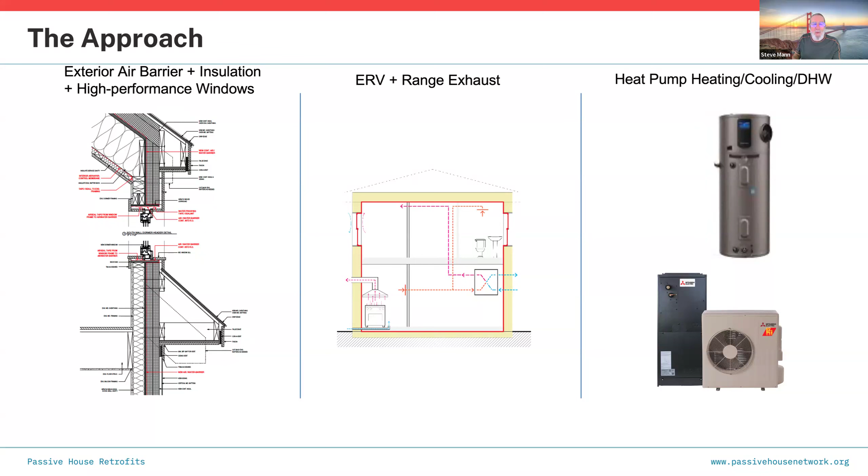And they framed in the attic and insulated that too. So it was a combination of exterior and interior insulation. But in order for this to work, they pretty much had to decide they were going to strip the outside.

And they also dug up the basement. I'm not quite sure why. I'm guessing because it was unfinished, it was dirt, and they wanted to turn it into conditioned space.

So they dug it up, put in their finished water barrier, air barrier, and thermal layer all at the same time, and then poured concrete over top of it.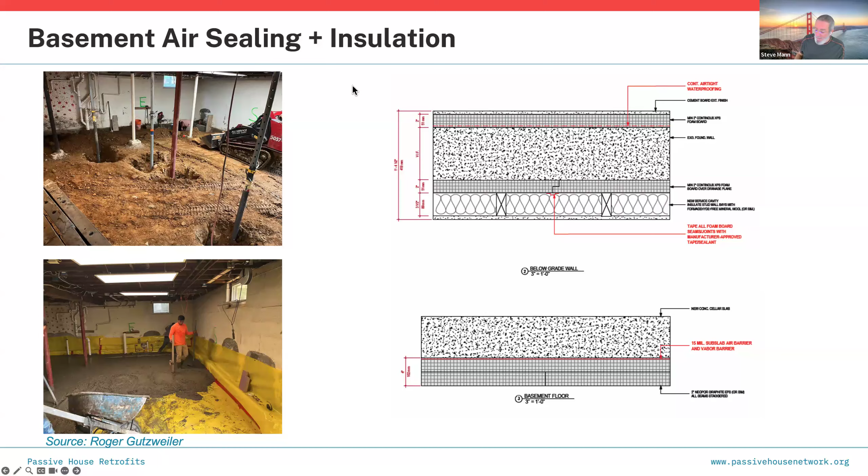On the outside, they air sealed with Henry's VP 100, I believe, which is a peel and stick membrane. There are different products you can use to take this approach, it's just one of them that I'm familiar with. Then they put mineral wool over top of that, I believe it's 6 inches. And then over top of that, they put furring strips, and then over top of that, they put a new finish material.

Now, this is what I commonly see here in California, even for new construction. I'll see they'll build the shell, they'll sheathe it, they'll install the doors and windows. They'll put the air barrier on, they'll do a blower door test before they finish the inside or even rough it in. Then they'll put exterior insulation, then they'll put furring strips.

Then they'll put... here's insulation on the roof section as well. Mineral wool everywhere.

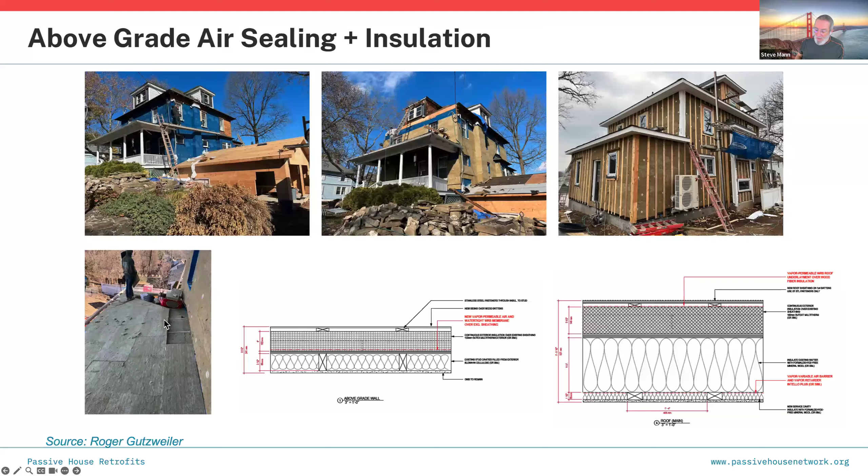This is a close-up of the window install. Again, this should be figured out before you start tearing the building apart. Exterior, interior insulation, insulated header. That's a very good thing to do.

Here's their U-value installed. And here's their FRSI, 0.67. Not a great number, but for this climate zone and this project, it's okay.

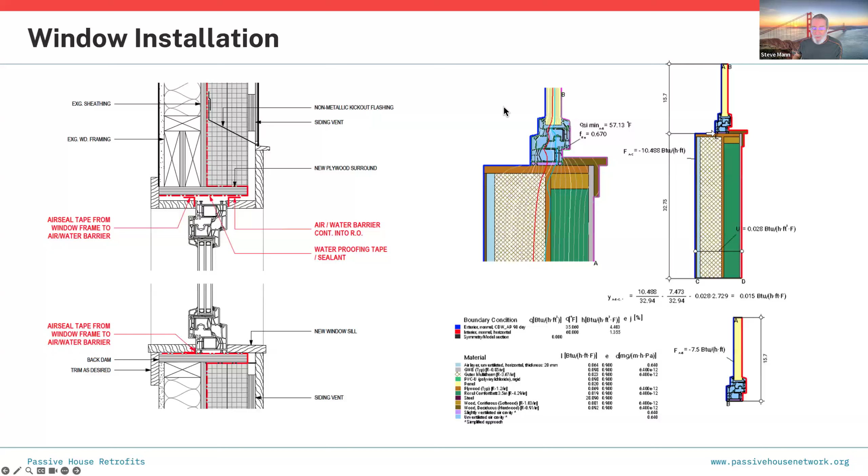All right, so this all happens very, very early on. I'm going to skip that part, that's just about heating and cooling loads. I'll just make one comment.

Here they did an ACCA calculation. For those of you familiar with heating and cooling loads, ACCA is sort of like the de facto North American standard. Passive house heating and cooling loads typically come in at about half of ACCA load, and I personally think the passive house heating and cooling loads are more accurate. ACCA doesn't take into consideration a lot of things that the passive house planning package does. So just beware, if somebody comes to you with ACCA loads, you might want to take a look at the passive house planning package loads and contrast and compare, and then discuss with the mechanical engineer or the mechanical installer.

Here's before and after. It looks almost the same, really nice, very traditional. One big difference you'll notice is there's no chimney. The chimney is gone because they don't need or want a fireplace. In a passive house, you really don't want a fireplace - it has no value, it serves no purpose at all.

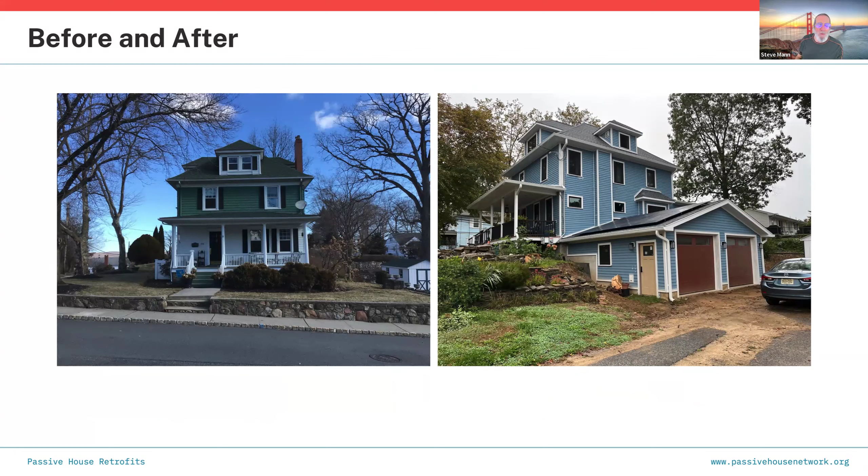Okay, finally, multifamily: Ken Soble Tower, before and after. Looks kind of old and tired on the left, on the right it looks very modern. This is in Hamilton, Ontario, Canada - our good neighbors to the north. This one is finished, I believe.

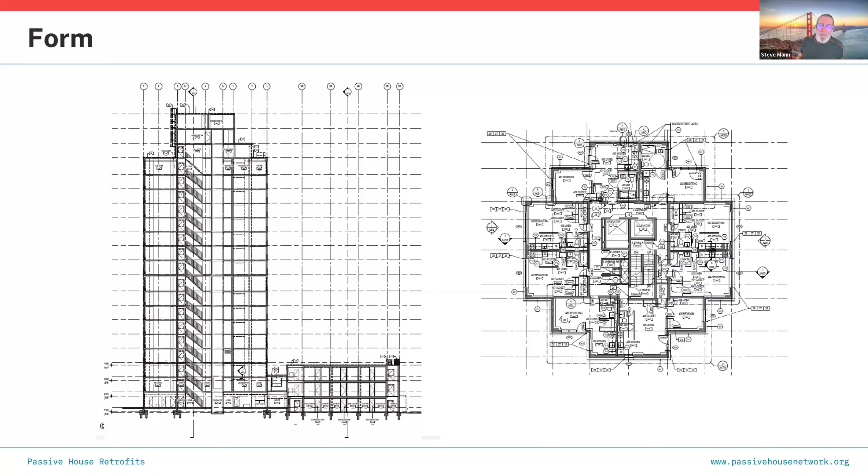There's a vertical section and a horizontal section. There's elevators, trash chutes, all kinds of stuff. Same questions though: where do we insulate, inside or outside? How do we get it airtight? How are we going to provide building services - heat it, cool it, ventilate it, and hot water?

The typical walls, they decided to go with an R43 wall, and here they again decided to insulate on the inside and the outside. So they didn't tear off the outside, they just covered it up and put in, in this case, an air barrier and a water barrier combined, then about 6 inches of mineral wool.

Again, over here you can see how they did that - here's what this is like a mock-up. Here's the masonry, whether it's brick or block. Here's DensShield, fireproofing where they needed it for some new sections. Here's an air and water barrier - looks like either a spray on or a parge coat. Here's their mineral wool, and then 2 layers of what's an EIFS system, which is basically an exterior stucco system. And they put it all together, and this is what it looked like during construction.

This is as they were tearing it apart, because in order to do continuous insulation, they had to get rid of things that stuck out or obstructions to that continuous layer. So they had some exterior work to do, and of course they had to rip up the interior too in order to accommodate this stuff.

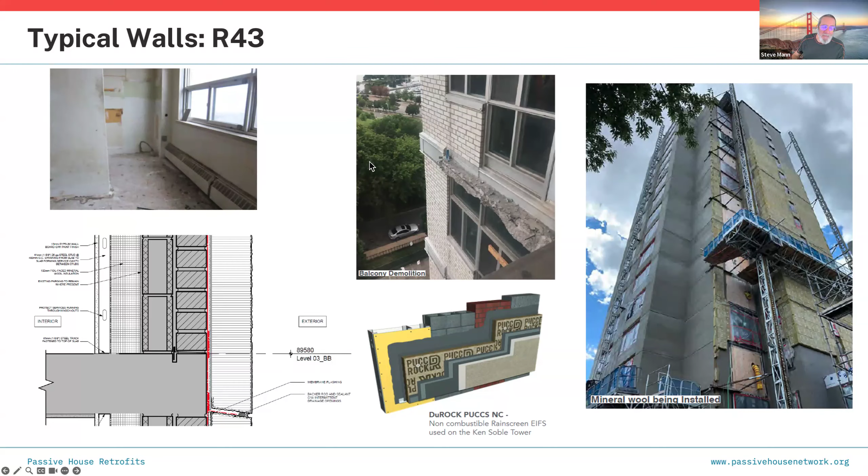The windows, they ended up hanging off the exterior masonry. Now this is kind of interesting - you can see they had these L brackets, and they set the windows on it. The L brackets are tied into the masonry with Tapcon screws. The windows are set on top of this, and then they insulated underneath the windows.

This was interesting because your typical steel angles, which is what's normally available in the construction world, had a psi install value of 0.114, which is a thermal bridge - really higher than you want. It seriously affects the U-install value of the window. So in this case, they were able to get fiberglass angles instead - same size, same function, same attachment, but the psi value was lowered to 0.086. Not great, but better than with steel.

So they figured this all out, and the results from a passive house modeling perspective were satisfactory. Again, before they tore the building apart, they had to figure this out, really.

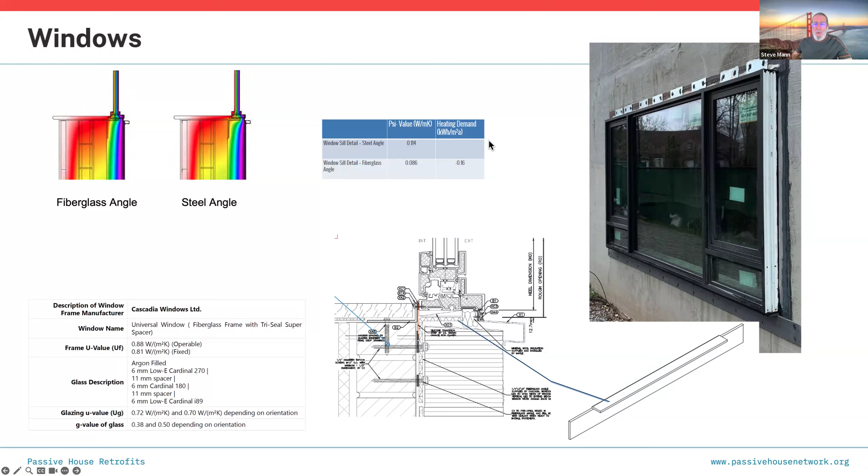Down at the ground, this is what they did about the thermal bridging. Remember, one of the tough areas is what do you do down at the concrete footer at the bottom, or the concrete wall, or whatever your grade situation is to the building exterior walls. This is what they did here - they insulated the heck out of it. This is your mineral wool coming off the wall. They excavated and put in another 8 or 10 inches of insulation, and air sealed it down to the footer. That's all they could do without really getting radical.

152 millimeters of XPS - XPS is about R4 to 5 per inch. 152 millimeters is about 6 inches, so this is about an R20, something like that. Up on the roof, they wrapped around and did an R43 roof with a fluid applied membrane and 4 layers of 100 millimeter insulation - so this is 16 inches of R4.

Bigger buildings are interesting when it comes to air sealing because the buildings aren't all ready at once. Crews start working on a certain level and work their way up or down, or follow designated sequences. You don't want to wait until the whole building is done before doing blower door testing. So in this case, and what's done in many places, they did floor by floor testing, meaning they air sealed an individual floor and tested it for air tightness, so they could find leaks and measure what they had.

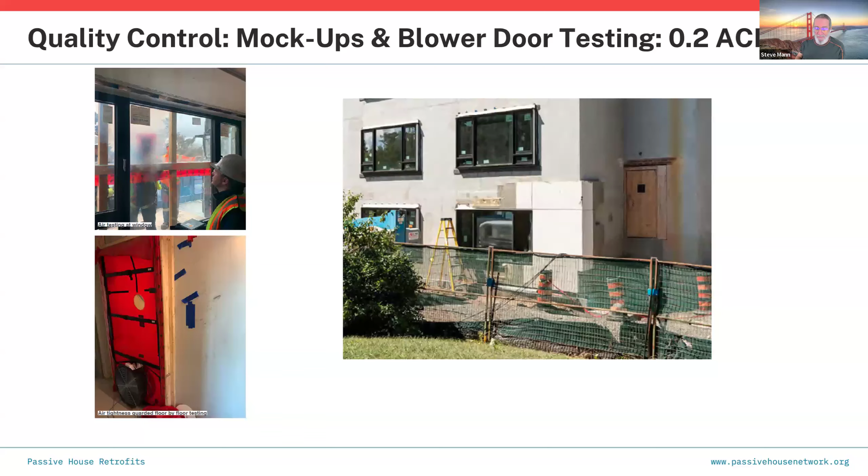For ventilation, they had lots of different types of ventilation units depending on the type of building. I'm not going to go into that too much, but they had to deal with it. They did a combination of on-roof stuff or stuff on individual floors where they would ventilate multiple units on each floor, common areas, and so forth. Much more complicated than a single family.

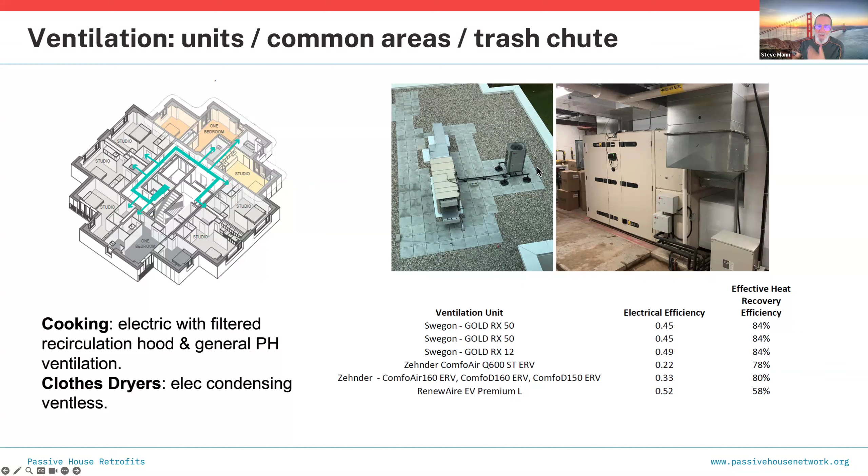Heating and cooling, again, more complicated. They had some heat pumps for heating and cooling, and some really big ventilation units. Here's their condensing boilers, and here's their drain water heat recovery, which can really help reduce your hot water loads in colder climates — not so much in our climate, at least in the bulk of California.

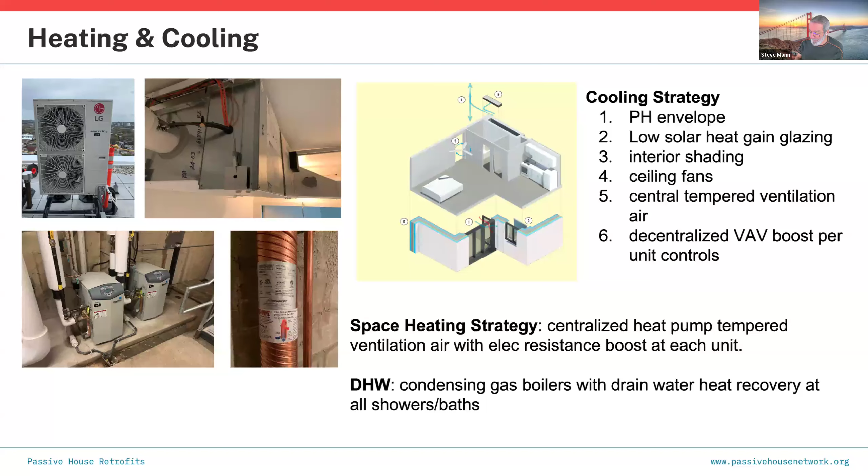So, next step. If you want to do an EnerPHit, you have to use PHPP, work with a certifier, and get a certified consultant or designer. Leverage your community. The passive house community is small, but it's generous, so it feels large. Let me put it that way.

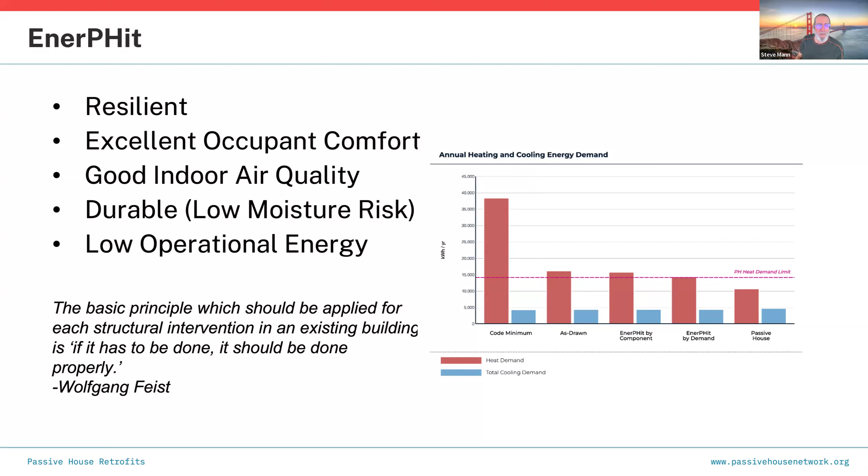Takeaways: the emphasis is on resilience, comfort, air quality, durability, and low energy consumption, which is a side effect of the first four principles. The basic mantra is if you're going to do it, do it properly. You can reduce your energy consumption on an existing building by 80 or 90%, and build a great indoor environment that the occupants are going to love. If you've ever been in a passive house building, the first thing people say is, 'Oh my God, it feels so different, I love it.' And that's true, because they're great.

It looks like we've got a few questions, if the scroll bar is not lying to me. No, I don't see any questions.